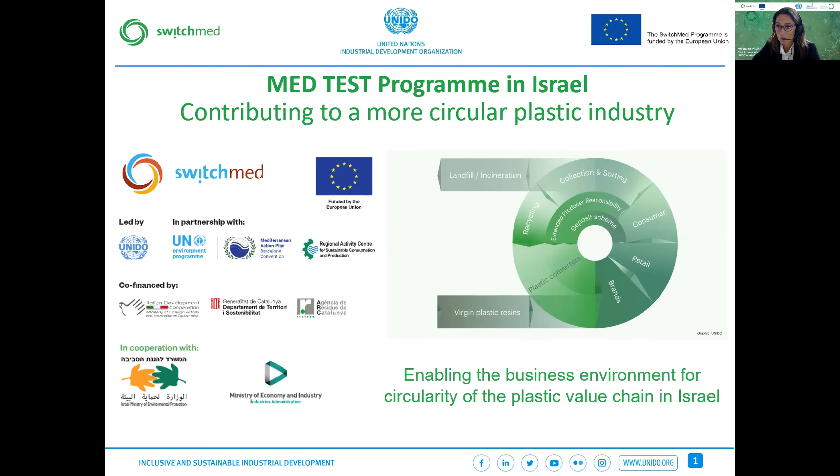And actually, we are active along 3 main areas of intervention. The first one is completed so far, and it implied the first analysis and review of the current plastic value chain in Israel to understand where are the opportunities for introducing circular business models and what are the challenges that we would like to address. The second area of intervention has also been closed so far, and we have been working closely with the Association of Plastic Producers and Manufacturers in Israel to support them in putting forward guidelines for design for recyclability of plastic packaging, and we have closely worked with them and also with the government to design standards and policy incentives to promote circular economy. And finally, a third area of intervention that has also been completed so far was related to supporting the government in conducting a pre-feasibility study to establish a PET bottle-to-bottle recycling plant in Israel.

Now, when it comes to the phase that has already been completed, we have received a lot of interest from a number of stakeholders to participate further in demonstration activity. This is why we have designed pilot projects that are currently under tendering, so we expect to launch them by the end of this year. We have conceived currently 3 different pilots. One is focusing on setting up collection, sorting, and recycling of plastic waste from the agriculture sector. A second pilot is focusing on circular design of plastic packaging, and finally the last one is related to logistical and business models for recycling flexible packaging.

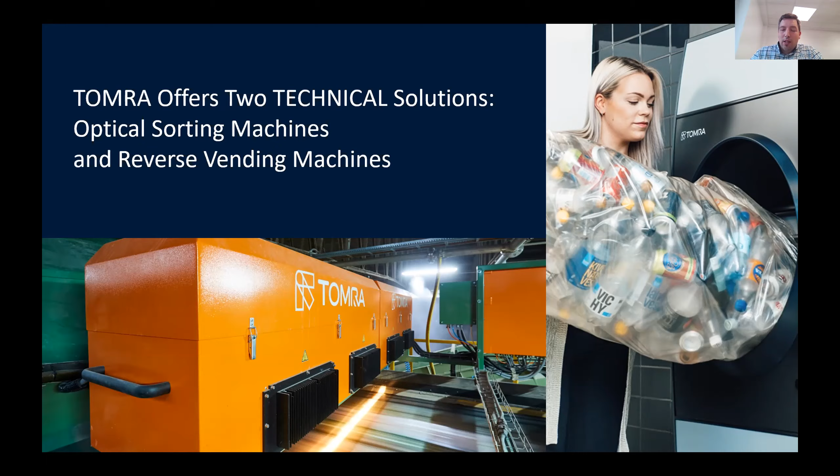Our role in this is that TOMRA is now already 50 years old and basically a passionate leader in that industry. Especially the division where I'm part of, the circular economy team, we really focus on collection, sorting, and recycling, and look at that from a holistic perspective in order to really create closed loop systems. Many of the presentations you will hear today are either our customers, partners, or friends, and the industry moves toward that. Basically, we are all really here to help the world recycle.

If you think about sorting conceptually, basically sorting is done for 2 different reasons. On the first hand side, you have a recovery of plastics. Again, we are today focusing on plastics, recovering plastics from mixed waste streams. And if I say mixed waste streams, it could be different sources. It could be waste which is already separated, so source separated plastic packaging. But it could also be plastic which is recovered from mixed waste, so from residual household waste. I'll come back to that later on.

So that is one part, let's call it primary sorting, where you really recover the plastics from waste streams. Then the second part where sorting is applied is during a recycling process, mostly the mechanical recycling process, where you basically increase the quality of the material throughout the process, and where you would do different sorting steps. I'll come back to that later on.

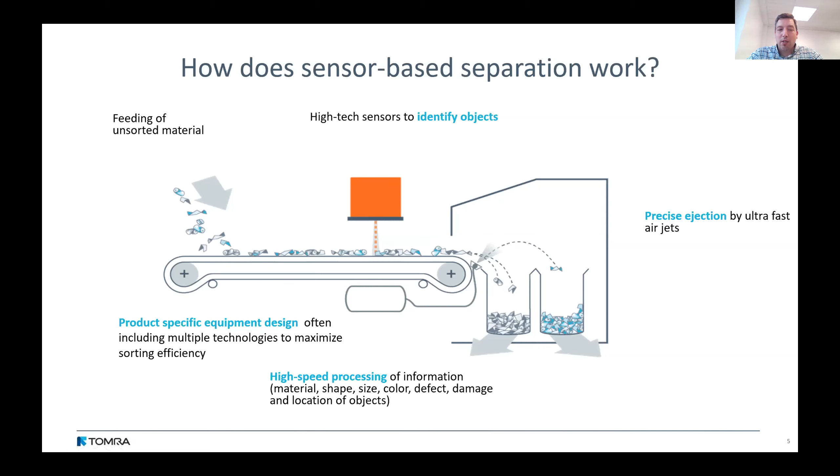When it comes to transportation, there are different means. Either it could be on a belt or on a chute. The chute system is smaller in footprint, the belt system is larger. You would use a belt for material which is not uniform and does not behave in a uniform way—for example, if you sort out waste, you have different kinds of objects and need a belt to be able to separate it. If you have smaller, uniform objects like flakes, you would use a chute-based system, because everything flows nicely and it's easier to use in a chute setup.

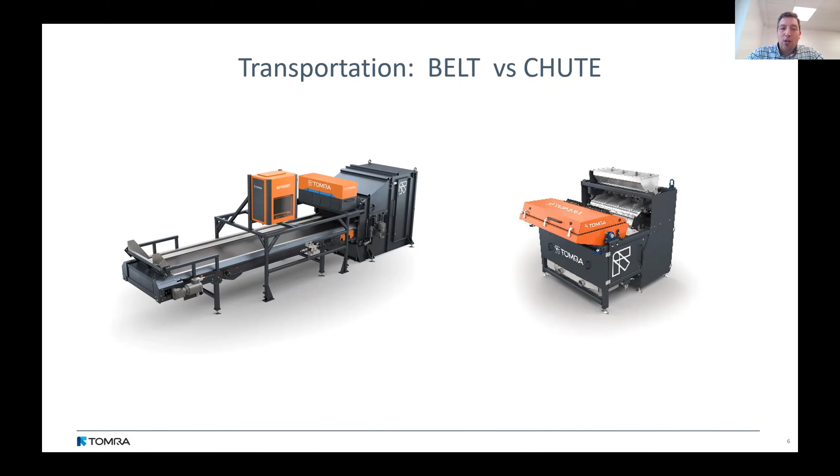When it comes to detection, there are many different sensors available today, across the electromagnetic spectrum. For plastic, the state-of-the-art technology used is near-infrared spectrometry, where you basically use the spectral information to differentiate different types of plastics. But you can also use color cameras, for example, to discriminate the color. There are a whole host of other technologies used more in other applications, like X-ray, which is used in metal sorting. You could also have electromagnetic sensors, or lasers, laser fluorescence, and other things. But again, for plastic, it's mainly near-infrared spectrometry as well as visible spectrometry which is used.

When it comes to ejection, there are basically two kinds. The most common one is air ejection, where you have a valve block with many different valves, and depending on where the object is, it's ejected. This has already been state of the art for 25 years.

What has lately been introduced to the market is using robot arms for ejection. Pros and cons: the disadvantage of a robot arm is that it's rather slow, so you can do about 1 to 2 picks per second. The benefit is that the robot is more compact, and it could do sorting into many different fractions. While sorting with valve blocks can be done at a very high speed, the disadvantage is it takes a bit more space, and you can only sort into 2 different fractions at the same time, so you need multiple sorters to sort into more than two fractions.

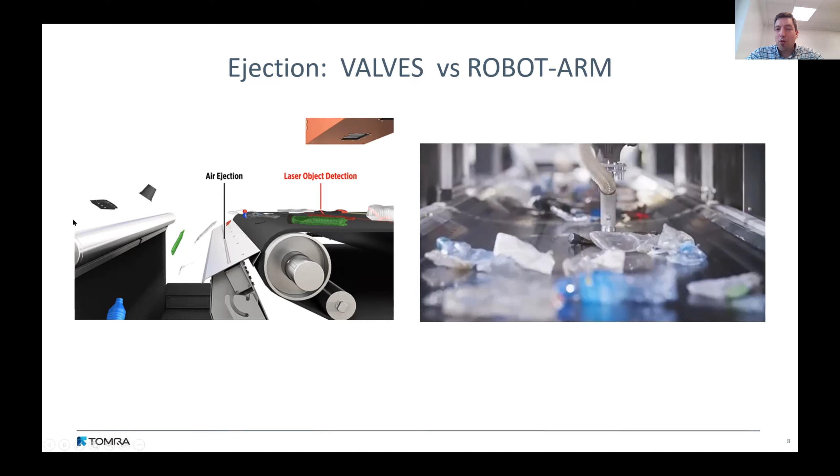When you come to a sorting concept, basically a sorting plant has many different sorting steps, and not all of them are sensor-based. There are also mechanical or physical separations like sieves or magnets. Especially when it comes to separation of plastics, you use sensor-based sorters. In a typical MRF, material flows over different sorting steps, so at each step you're sorting something out and the rest goes on, creating different outputs. At the end of the day, it's about your economy of scale and how many outputs to create. The latest, biggest sorting plants could easily have 20, 30, 40 or even more sorters present.

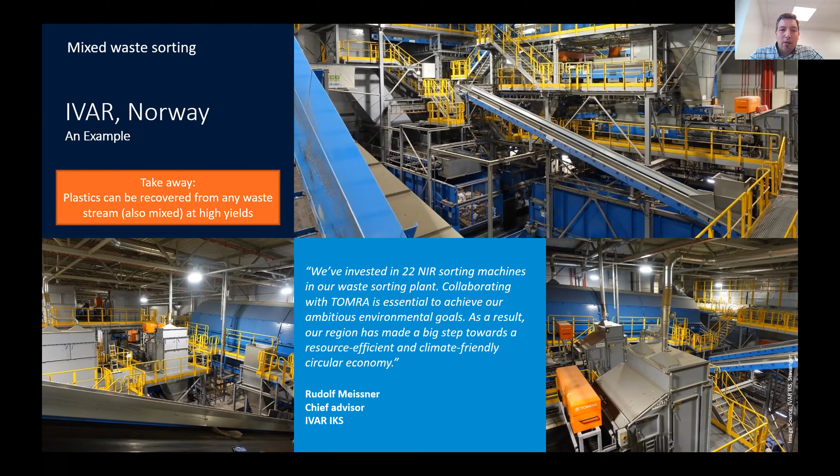Here is an example of a mixed waste sorting plant. Mixed waste means residual waste—not a source separated plastic fraction, but really the mixed household waste. This example is based in Norway, where we have several plants operating on that concept. Here, 22 sorting units are used. The takeaway is that today it's economically and technologically feasible to recover plastics out of any waste stream. Even with a totally contaminated waste stream where everything goes to one bin—like plants we have in the Mediterranean, in Greece—it's possible to extract plastics out of a very dirty waste stream. That's not a technical problem anymore. It's solved, and it's done in many plants worldwide.

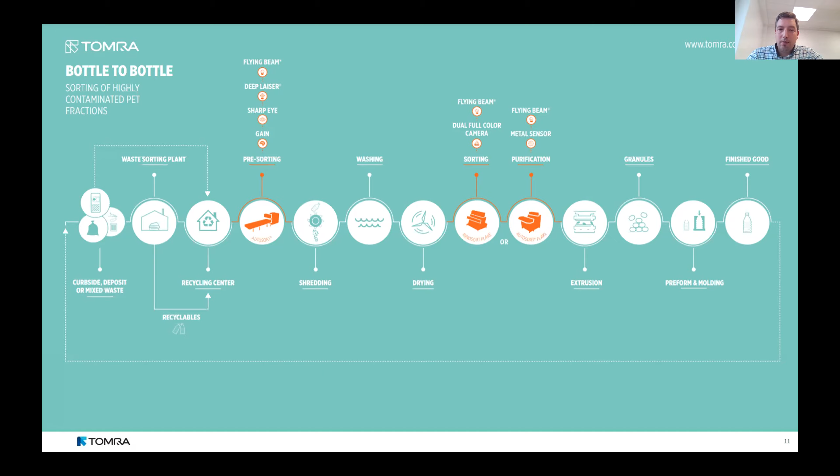Another example is high quality recycling, not only for PET but also for polyolefins and other plastics like polystyrene, polyamide, or polyurethane. There we've teamed up with Borealis, creating a demonstration plant where we show that with the right sorting, washing, and extrusion, you can also reach high quality recyclates with any other kind of plastic. Today you'll hear a lot about this—I think there will be a presentation from Nextloop and also one from Morsinghoff, which will explain that concept further. But really, there's no reason why other polymer types besides PET cannot be brought back to high quality with the right process parameters.

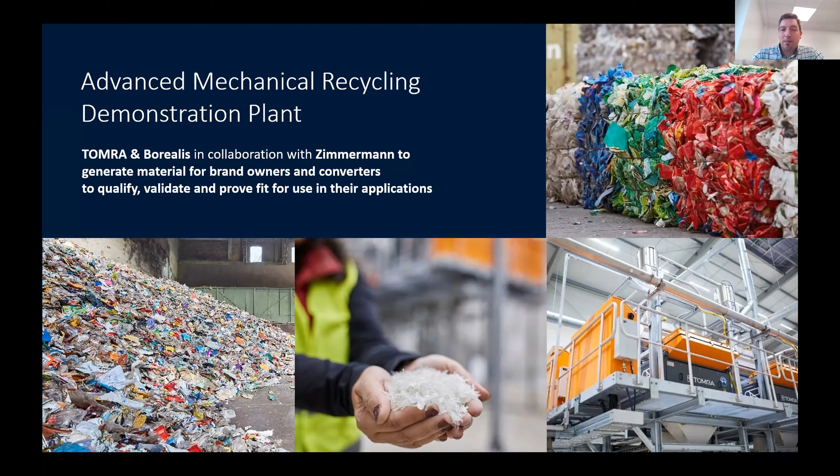There is also a role for sorting in chemical recycling. Basically, we have to capture the feedstock, so you need to sort household waste to recover plastics and make them available for chemical recycling. It's also a matter of preparation of feedstock and quality control. Most chemical recycling technologies cannot take totally wild feedstock; they have quality specifications, as PET or PVC might be an issue in pyrolysis. So you need sorting to make sure you don't have too much PET or PVC contamination in your feedstock going into pyrolysis.

So to conclude, what is state of the art? It's state of the art to extract plastics from any other kind of materials. It's also state-of-the-art to sort plastics by color and by plastic type, sorting rigids from flexibles, and we can even go a step further to differentiate PET bottles from PET trays.

What's the future? The future is to do even better sorting. For example, sorting by melt flow index to differentiate blow molded versus injection molded objects. Another big thing is sorting food grade versus non-food grade. This is necessary under European legislation on food grade, to make sure something was food grade before it goes back to food grade.

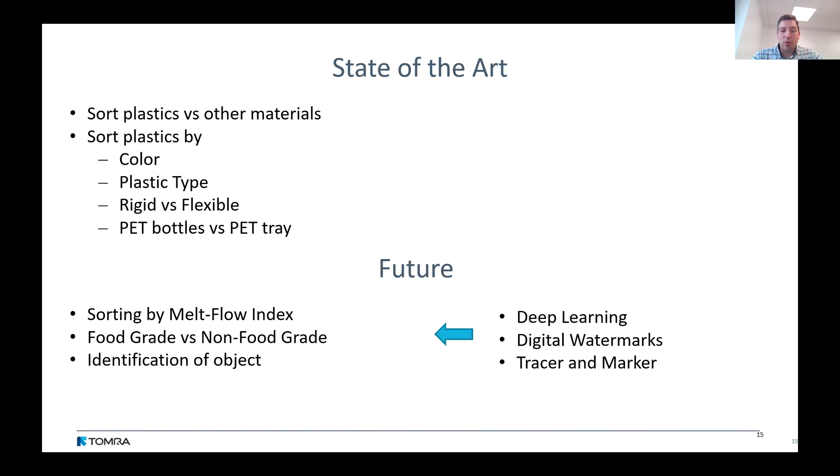The third method to achieve this is with tracers and markers. You will later hear about Next Loop, who use fluorescent markers to identify different features which cannot be identified with conventional sorting processes. So my summary is that sorting technology can already solve a lot, and most of today's problems can already be solved from a technical point of view. Sorting is currently not really the bottleneck — the bottleneck is more around the economics of sorting. That would be my main message to you.

So are there any questions?

Perfect, Daniel. Thanks for this presentation. I think you've broken or challenged a lot of strongly held conceptions in the sorting and recycling domain, which is really, really interesting. If there are no questions, I want to take the opportunity to ask you my million dollar question — not many opportunities that we have to speak to Tomra.

What do you think is better, separation at the source or sorting at the MRF through mixed municipal waste? From a fundamental point of view, sorting at source is maybe not really needed. If you start from scratch, say in Indonesia or Vietnam where you have nothing, what should you start with? Maybe you would really start with collecting the waste and sorting it out later. Of course, if you've already established source separation systems like we have in Europe, it would be stupid to abandon them — they have advantages and make recycling easier. But source separation makes recycling easier, not sorting at source doesn't make it impossible; it just means you need more effort on the recycling side — better cleaning processes, better sorting, better washing, etc. So let's say it's helping. If you've already done it, you should keep it, but maybe it's not absolutely necessary if you're starting from scratch and wondering whether you should have 2 bins or 5 bins or 20 bins in a country which currently has nothing.

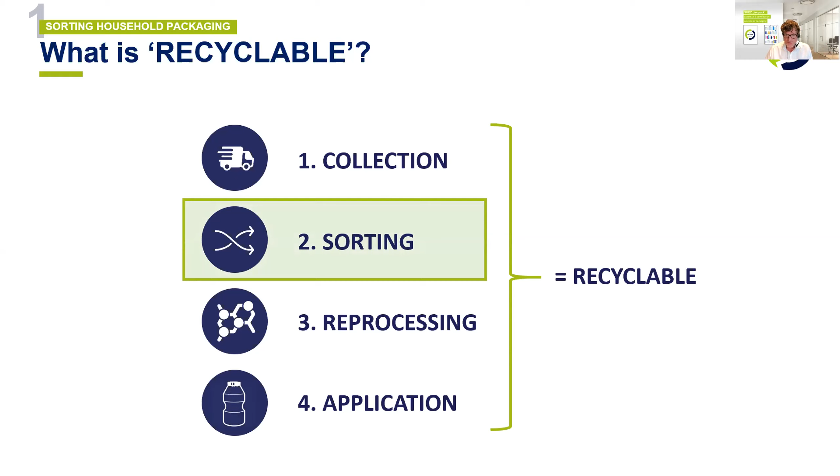The process that follows before it goes to a reprocessor. Here is a schematic overview of the process of a sorting facility. This sorting facility specifically was built for plastics, metals, and beverage cartons. Other countries or lines specifically also take in glass or cardboard together with these plastics and metals, so the technologies in place here might differ a bit from others, but generally these technologies are used worldwide across different industries.

As soon as you have an automated sorting system for packaging waste, these are the technologies in place. The waste gets unloaded from the truck to the facility, and there we do a quick inspection. We take out some unwanted materials, large pieces of garden furniture for instance, or metals, but also huge pieces of film, and the rest will be put into the bunker, which is pushing forward very slightly, very slowly.

Then you have a bag opener, because people put their packaging waste in bags. These bags need to be opened because we want to identify each packaging item individually. That's why we actually have another bag opener, to ensure that even if people have put it into two bags, everything will be separated before it enters the rest of the process.

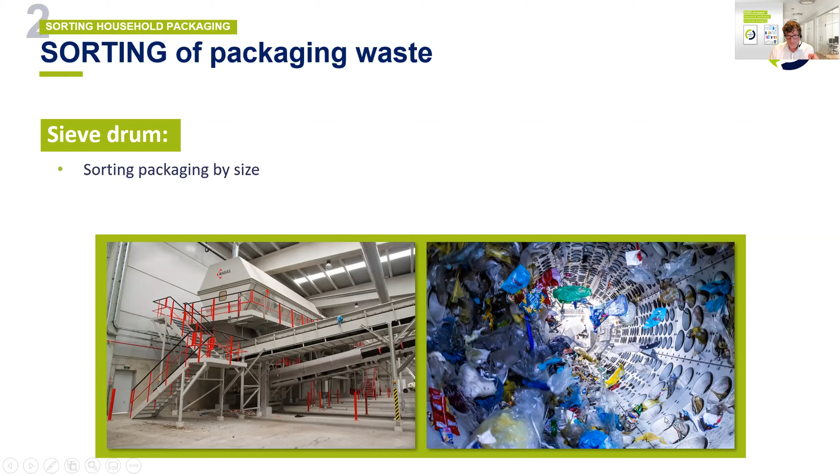In each sorting facility, you see these big tubes running to the facility. This is basically where the lightweight materials are actually sucked up and transported to a bunker or a conveyor belt where all this material comes together. And that's a good way of doing a first separation of the lightweights from the rigids.

The overbelt magnet: materials on the conveyor belt, a mix of materials, and just this magnet is on top of it, picks up the ferro metals and releases it afterwards, and that's how you get a separation. Let it fall after the threshold.

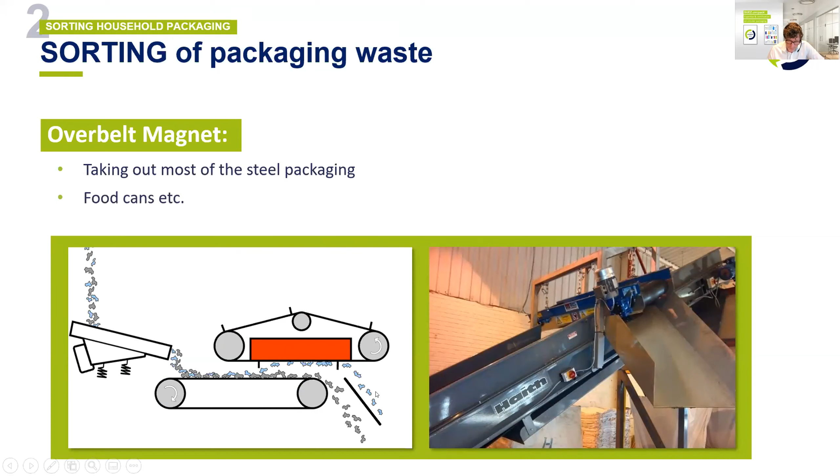Similar thing, but now with eddy current. So there's no magnet on top, but there's an electrostatic charge created underneath, which actually makes non-ferro metals jump out. They want to get away from this electrostatic charge.

Here we actually see that there's a difference in behavior between the rigid pieces and things like film, which are more flexible and larger. And that's basically like having an apple fall from a tree or a leaf fall from a tree. If it's an apple, it will fall down in a straight line. So in this case, it's much easier to eject over the threshold because it will go out in a straight line. And if you have a flexible piece of aluminium film, it will react, but it will probably not pass in a straight line. It's got too much friction in the air, so it will most likely fall down already.

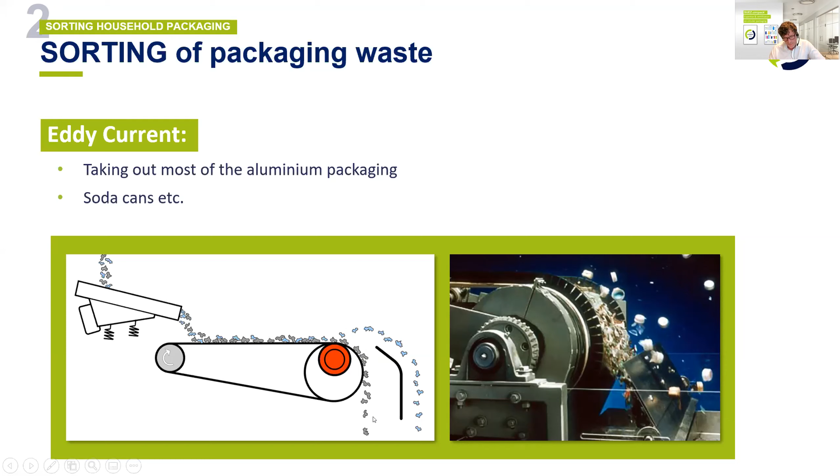So here, well, I'm not sure even if the source was TiTech or Tomra, looking at the previous slides of Daniel. But indeed, this is the representation of the infrared system, where we can see this picture. So we see this Coca-Cola bottle there, and this is sort of a representation of what this infrared system sees. And you can already see there that we know it's a PET bottle. And that's correct because it's green on both ends.

We also see that there's some blue on top, so it must be an HDPE cap. And then this sleeve, there we get a mixed image because the system actually doesn't know what it is. It's really a combination of materials.

The depth at which it is looking is somewhere between 80 and 100 micron. So every material between this 0 and 80 or 90 micron, it will get a reflection of. So it's basically looking not only at the sleeve, which might be 45 micron, but also the PET bottle underneath. And that's why it gets a mixed image and is not entirely sure what this looks like.

Well, there are new technologies upcoming to get better recognition on this. And luckily, because it's got PET on both ends, the system knows that it should sort it as a PET bottle. But you can imagine if you have a full body sleeve, really from the top to the bottom, that it might be very difficult to do so.

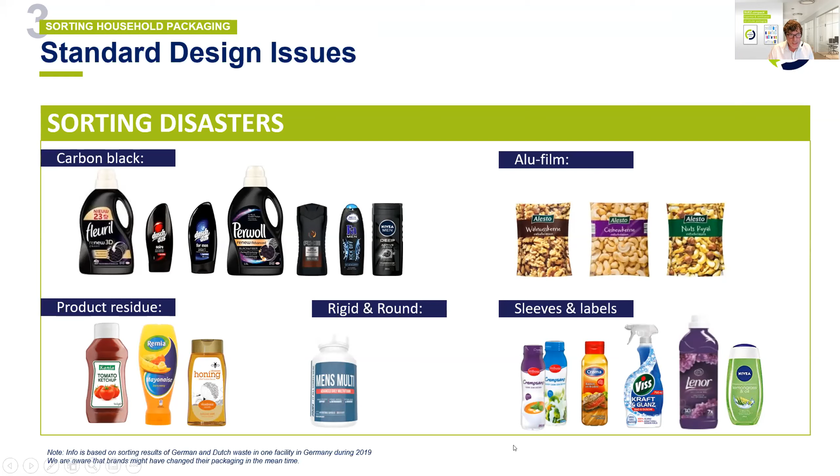These are really big issues in the sorting, and well, they can luckily be made up partially by new sorting technologies that are upcoming.

Already discussed robotization, image recognition, and deep learning, which will be really helpful in understanding the packaging, not only in positive sorting, but also negative sorting. Meaning that, for instance, silicon sealant tubes are typically made in PP, and silicon is something that you don't want in between your melted plastics, because it will not melt. So it causes a lot of issues at the extrusion lines. So if you can already take it out by just knowing, hey, this is the shape of a silicon sealant tube, and these are the brands, and this is what they normally look like, that can be very helpful to separate them.

Another thing is all these digital watermarks, the Holy Grail 2.0 project already mentioned. There's a semi-industrial scale pilot ongoing in Copenhagen at the moment. It basically means you have packaging which for the human eye looks completely normal. Only if you look very carefully do you see small dots in certain patterns, which makes it actually behave like there are barcodes all over these packaging. And these barcodes give information to feed to the sorting system, but also to the cash register at the supermarket on what to do with it.

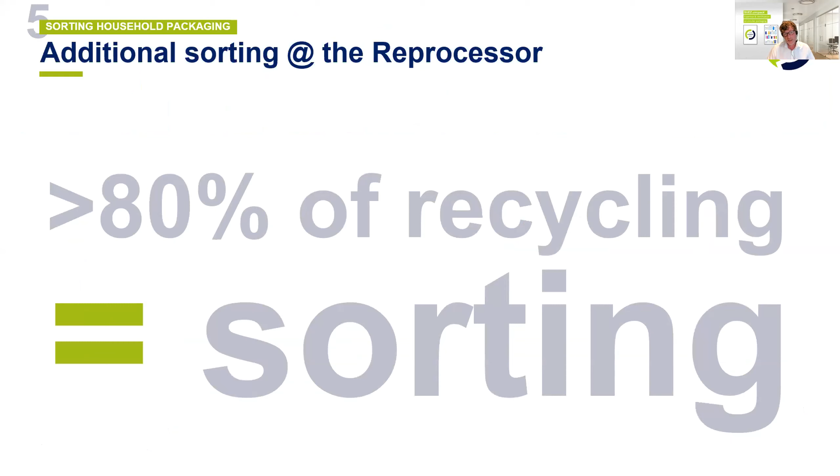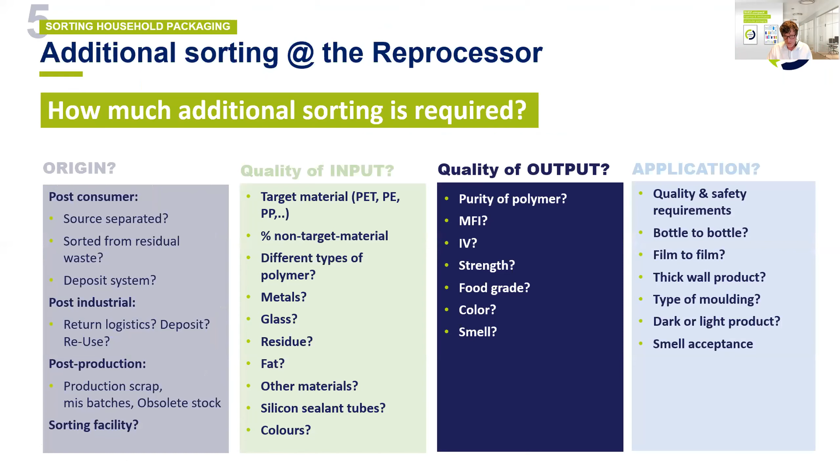Thanks. So after all this sorting, material will go to a reprocessor, and even there a lot of additional sorting is required, because more than 80% of recycling is about sorting. How much needs to be done really depends on origin of the waste, the quality of the input, but also on what output is desired and for what kind of application. That's an important thing to understand, but that will come later during these days.

Just for your information, there are huge differences throughout the world. Really understand your local market on producer responsibility systems, but also on EPR fees and taxes. Recycling results can differ hugely per country. What is collected, how is it collected, is it part of a deposit system, is it curbside collected, and which materials are actually sorted and reprocessed? All this combined will define what you have to deal with as a brand owner, and as a packaging company, to ensure recycling.

The UK market for flexibles - very little of flexibles in the UK are collected. Where they are collected, it's generally films that are collected rather than the actual packages themselves. So this is the journey from a country that hasn't really grasped the collection and sorting of flexible packaging itself. First off, we need to understand where in the system flexibles will fit, how much arises from households, from household-like businesses where the waste looks like household waste, as against pallet wrap etc. which fits in commercial packaging. So separating those to understand where the materials arise and how much will actually get through to the different streams we're collecting.

So we did a lot of work. We did top down - placed on market figures are quite difficult to identify because you can't really understand what you want to collect until you understand what's placed on market, and not many organizations seem to have a good grasp. So we did top down first, three or four different ways. And then we did a bottom up - we went and collected detailed composition analysis of how much flexible packaging of what type appeared in the residual waste, that's not going to recycling, and how much appeared in the recycling waste, which gave us a good grasp on the composition by all the different packaging types.

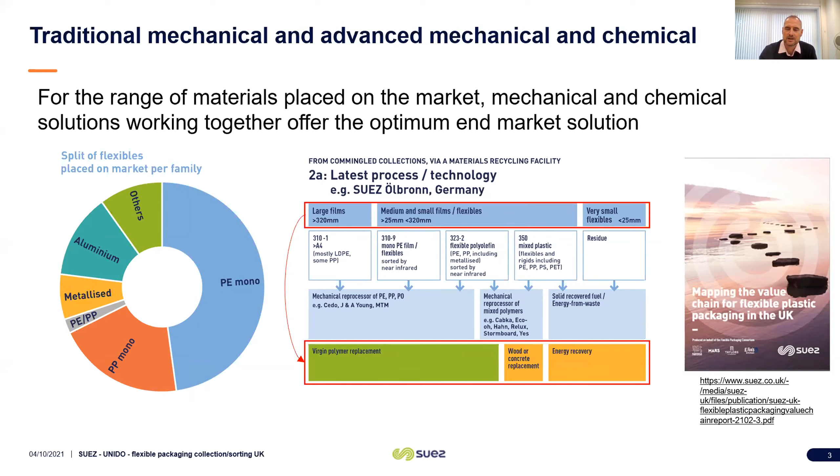Then for ease of management, not only in this work but also the work we've just completed on industrialization, which I'll come to towards the end, we split them into families, because once you've got them into families you can understand how each will be treated and where its end market will be in that process. So in the flow diagram 2A, you can see how those materials split out, how they're going to be collected. We used some of the information that Vincent and his team got from other sites to help us put that together in terms of what would arise, what size would arise - because size becomes important - and what we can do with it in the end. Large films go to virgin polymer replacement, and as you get smaller and more complex materials, it's going to wood or concrete replacement. Ultimately, in this example, that's too small or too mixed, going to energy recovery.

So how you collect determines what you want to sort. If you collect the materials on their own, source separated, then you don't need a sorting plant to separate them from the other hard recycling materials. If you collect them commingled with other materials, be it other plastics or materials beyond plastic, then you need to design your sorting plant to separate them from that stream.

What you need to do though is make sure that we don't have fiber products mixed with the flexibles, because of the 2D nature that they present.

So again, looking at how many packs, looking at where they arise, and understanding in detail. One of the key things is also what product they had in them. Generally, users of packaging that has wet product in it, such as cat food, dog food, or toothpaste, tend to leave a fair volume of product in the packaging itself, which creates issues on collection - smell, leakage, and contamination to other products.

So we split not only into the families you've seen before, but also into dry and wet, to represent their likely composition of contamination that was going to come in, that was in the packaging in the first place.

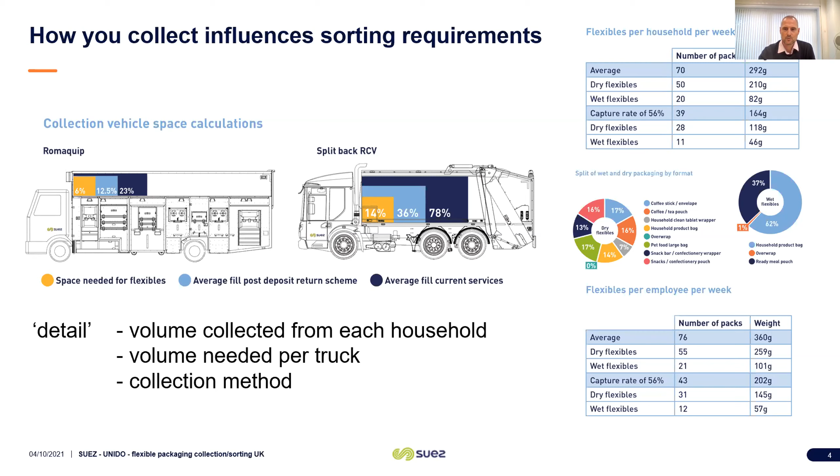And obviously that requires a different transfer station where we bulk up, and simple or complex sorting, depending on how we've collected it and what we've collected it with. We need to understand that to understand what our role is.

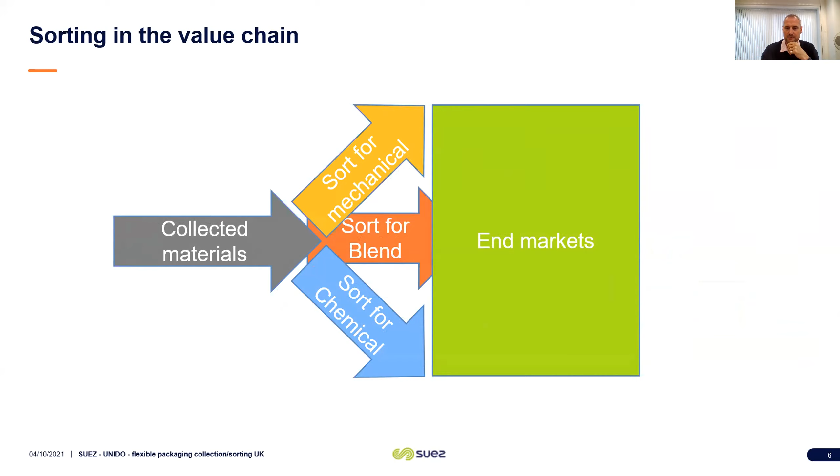And then obviously, once we've collected our materials, we need to understand what end market we're going for. Are we sorting for mechanical? Are we sorting for a blend? Or are we sorting for chemical recycling to get into our end markets?

So we ran through a series of designs. Here you've got one based on our Rotterdam plant, and another on our Ölbronn plant, where we looked at the difference between the two. Obviously different plants, but Ölbronn went down to a smaller size. So we're then sorting and collecting to look at where those end products would be.

When we got to medium films and flexibles, 25 mm to less than 320 mm, some of those could go into virgin polymer, but some were going into wood or concrete replacement. So again, going through those options to understand what we're going to recover for.

And for EPR, where the recycle rate is important, the volume that goes into energy from waste - which is recovery, not recycling - was material to understanding meeting some of the EPR and recycling targets.

We then looked at mixes of chemicals, so same flows, splitting them between different types of polymer and film and different sizes to understand where they might end up.

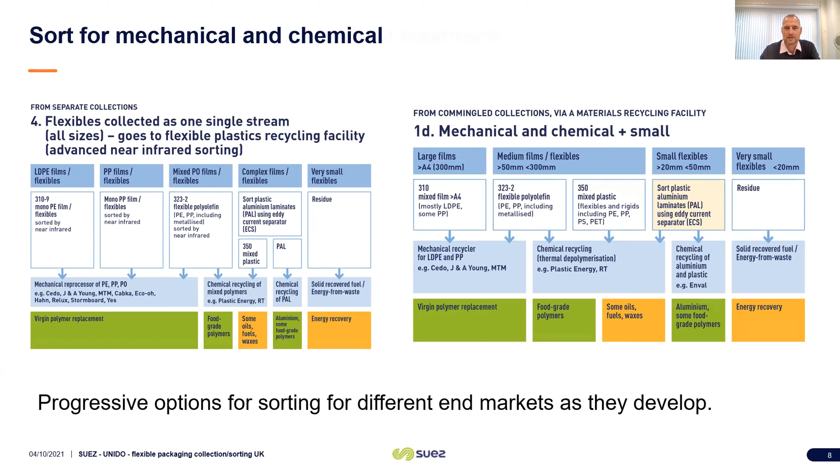Ultimately, we ran through 12 different options. If you want to, I've shown a copy of the report. We had to look at those 12 as the main routes to market for flexibles in the UK, based on different local authorities. If you're collecting from a very urban area, from a city, then your options of how you collect are very different than if you're working in a suburban area or a very rural area. So it's key, therefore, to understand how your source market is going to work.

And then also, if we're going to chemical recycling, we're then looking at how do we measure that? So if we go to chemical recycling to fuels, then that's recovery, not currently classed as recycling. There's some process losses in there that are either used to fire the process or are unacceptable. And then if you put it into a refinery, the refinery has its own process and looks to effectively hypothecate end products so that you can allocate 1,000 tons in, you can make 1,000 tons of recycled product. Again, making sure that process flow and mass balance flow is acceptable to the regulators that will ultimately allocate the recycling content of any products.

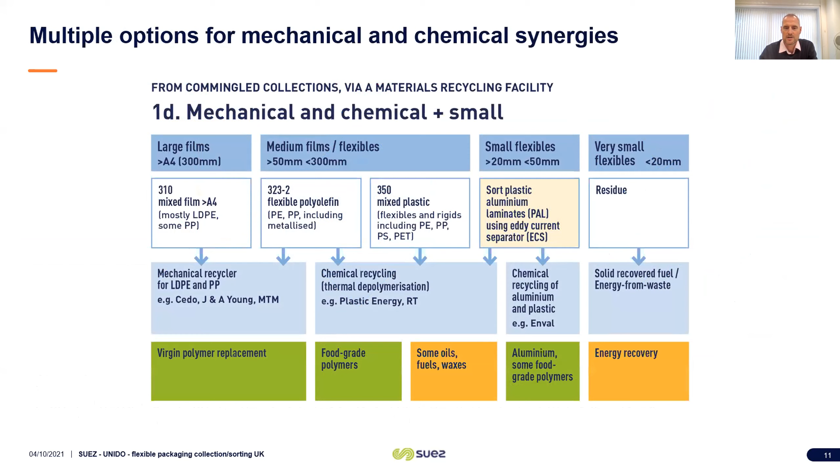So when we looked at, coming back to this one, just a reminder, we looked at mechanical and chemical and how the mix and the size. The work we've just completed was complete industrialization. We've been through every local authority in the country, which is more than 350. We've been through all the different styles of business to understand what they're likely to collect, what they're likely to produce and when. And then we've looked at how those flows need new infrastructure and new processes.

And we looked at that through a number of different options, so mixed with other plastics and cartons, fully mixed with other materials except paper and card. And then we looked at an add-on option of wet flexibles collected separately, so wet flexibles in a bag and dry flexibles with the remainder. So a mix of a bag for wet flexibles and then 2 or 3 for the remainder, and to work out the cost and the profile of doing that.

We then had to look at sorting yields, mechanical and chemical. So working through what we expect to get if we're sorting to greater than 50 mil or greater than 25 mil, so 80 or 85%.

What the mechanical reprocessing yield is likely to be on average, 80% to allow for. And then chemical recycling, which current activity, and we have our own chemical recycling process, is around 85% at the point that it enters the plant. So overall yields, 80% sorting and 80% of the materials passed through sorting being reprocessed gives you an average about 64% upper performance for mechanical, and 85 by 85 gives you about 72% for chemical.

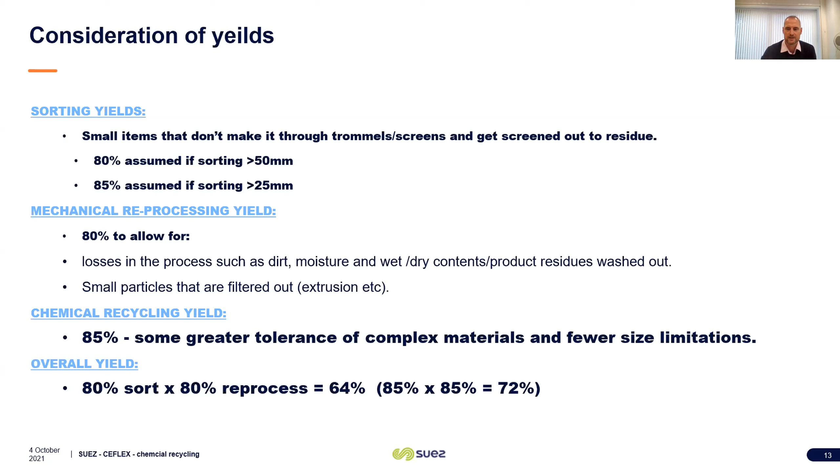So chemical has the ability to deliver a slightly higher recycling value than others. So what does that mean in summary?

Collection of feedstock drives the sorting end markets. So understanding how it's going to be collected, understanding how you get the behaviours right to get people to put the materials in the right bag in the right place. Clear signals about collection will engage investment. If you understand how you're going to collect it, then the investing requirements for the sorting plants, for the MRF sorting plants, etc., and the chemical recycling is there. Chicken and egg is collect first, and the markets will follow.

Chemical recycling does offer key to upcycle and deliver virgin polymer quality and outcomes for some of the feedstocks, and gives somewhere between a 5 and 10% uplift in ultimate recycling performance. Obviously, there's a lot of proving to do on chemical recycling to make sure that we can actually achieve the qualities and the reliance and the commercial outcomes that are needed.

In all chemical recycling, some materials may end up as fuels or waxes—still productive, but obviously not counting towards recycling.

Policy visibility and transparency are super important to drive investment, and there are significant numbers—hundreds of millions of pounds in the UK sector—needed to get flexibles collected, sorted, and recycled.

In designing the transition, nothing happens immediately. We think it'll take maybe 5 or 6 years for all the local authorities in the UK to implement a collection system that supports the sorting and treatment infrastructure behind it. We think business will probably be on a roughly similar profile, based on fleet replacement age. So planning that transition means going through the whole leg—not having facilities with no feedstock, but also not being in a position where we have feedstock and no treatment.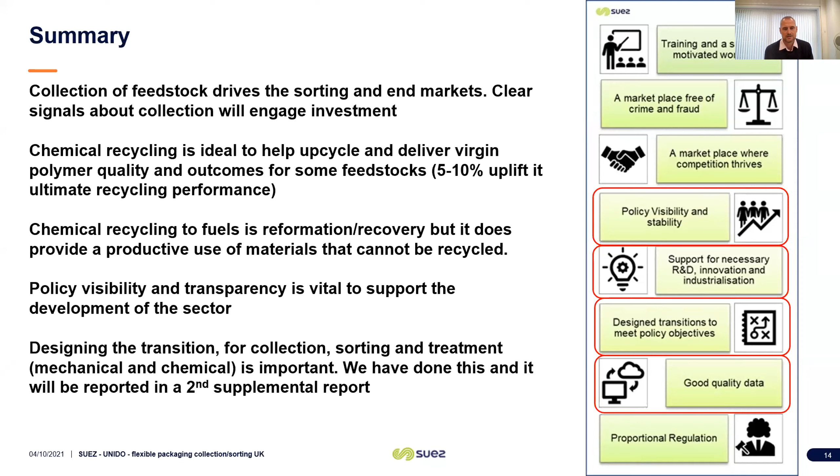Great, Stuart, thanks a lot. This is a very timely presentation and topic, because there is now a UNIDO-driven project exactly on this topic of flexible packaging in Israel. So we'll probably be in touch in the near future to ask you some questions. There was a question in the chat, but unfortunately we don't have any time left, so if you could be so kind as to look at the chat and try to answer that question. Thanks a lot. No problem.

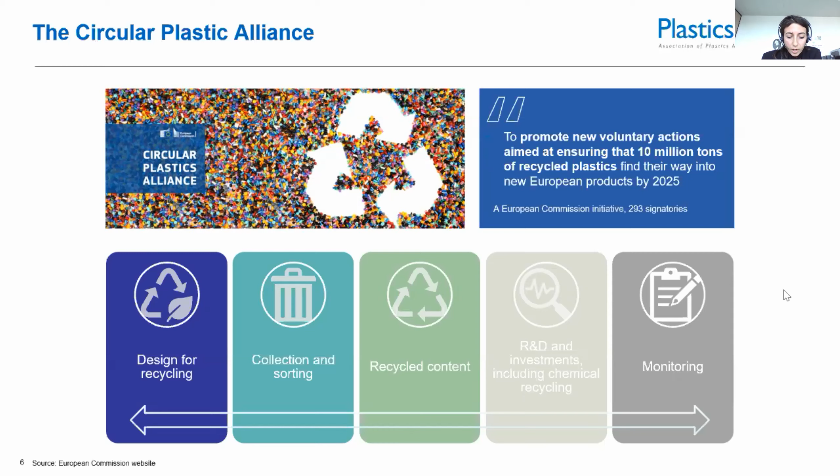On this slide, you see a diagram that exemplifies very well why an integrated approach along the value chain is needed. The idea behind this diagram is the CPA vision that design for recycling, increased collection, and better sorting will all contribute to producing a more reliable feedstock and therefore lead to high quality recycled content. The definition of guidelines and potentially standards on design for recycling, but also quality of waste, quality of recyclate, and how to integrate them into new products as recycled content will be critical to having products that are better designed for their end of life.

Really all the activities you see along this diagram, along this circle, are interlinked to one another. This is why in the CPA, the views of different parts of the value chain are integrated to really build the circular economy for different products.

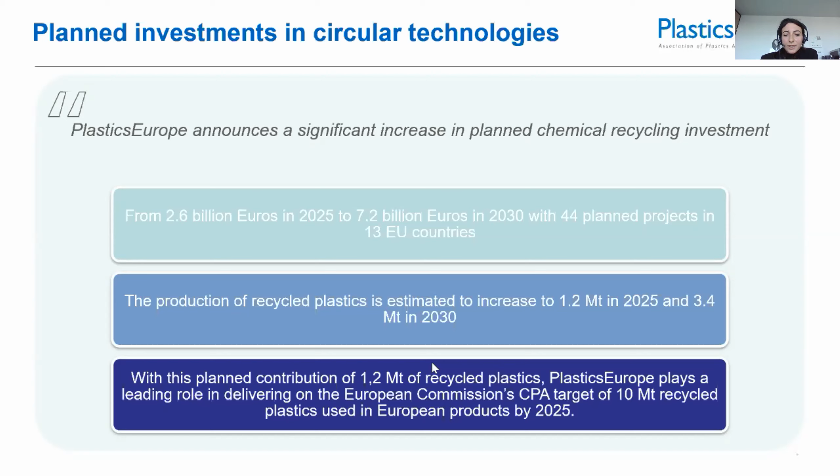So just to conclude, overall, I think we are contributing both to catalyze design for recycling to accelerate mechanical recycling, but also contributing to the CPA target of 10 million tons by planning to produce 1.2 million tons of recycled plastics through chemical recycling. In summary, I will conclude that we believe collaboration and cooperation with the value chain, different stakeholders, partners, and authorities is key in advancing the development of the circular economy in Europe, and we see a real opportunity in the CPA in capitalizing on its work and knowledge production for that. So thanks for your attention, and that would be my presentation.

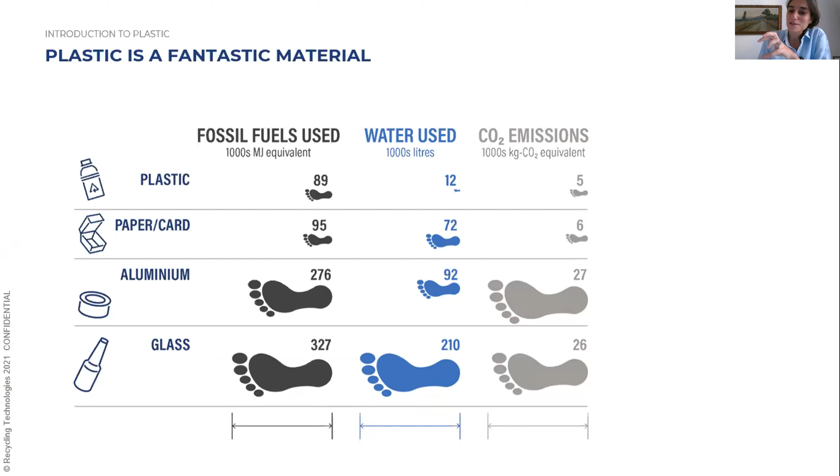So indeed, I'm Sales and Marketing Director for Recycling Technologies, which is a startup based in the UK that works on chemical recycling. Chemical recycling, basically, is about trying to maximize the residual value still left in plastic waste. We often like to start by saying that the general public often thinks plastic is a bad material. But when we actually compare plastic packaging with other packaging materials like paper, aluminium, or glass, we can see that plastic has a lower environmental footprint in 3 of the major categories: the amount of fossil fuel used to produce it, the water used, and the overall CO2 equivalent footprint. So we always fight the battle for plastic by saying that plastic is a great material, and actually the challenges we've got today are not caused by plastic, but by plastic when it becomes waste.

When we actually start looking at the size of the problem, let's move away from plastic as a product and look at plastic as waste, and the mismanagement of plastic as waste. In the UK, there are about 4 million tons of plastic waste generated, 32% of which is recycled according to official sources, but the majority, 68%, is disposed of in other ways. That's a mix of landfill, incineration, sometimes just burning, sometimes for production of electricity.

So that's why you see energy from waste, or exported. Very often in Europe, or in some countries, we have this little habit of sending it away, exporting waste, and effectively giving away the responsibility of disposing of it properly.

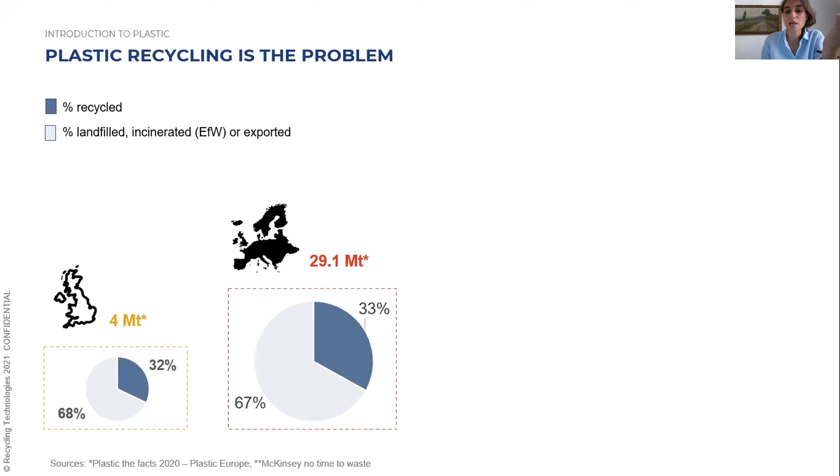And the numbers don't really change if you scale up. Moving from UK to Europe, the generation of waste or volumes of waste increases, which naturally goes with population. But the percentage of recycling versus non-recycled doesn't quite change: 33% versus 67%. And if we scale to a global perspective, 260 million tons of plastic waste was generated - this data is from 2018, if I'm not mistaken - but again, only 12% of that is recycled globally.

So this gives an idea of the size of the problem, but also potentially the size of the opportunity. Here, this is the vision that recycling technologies and many chemical recycling companies have for the future of plastic, for better management of waste. I appreciate it's a bit of a complicated slide, so I put some bullet points on the right for you to read, just in case you get lost in my presentation.

But if we start following from number 1, this is the value chain we're trying to portray. We are consumers, we live in our homes, we buy products from the retailers. We bring them home, we consume them. And the waste is then brought to a MRF, material recovery facility. Different countries will have different terminologies - you might have sorting center, MRF, plastic recycling center - but the concept is that the waste you throw at home is brought to a single place where it's then separated into different valuable items.

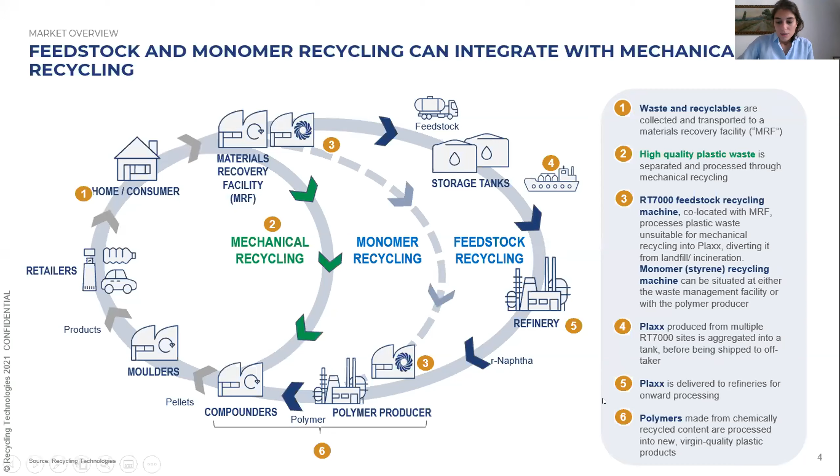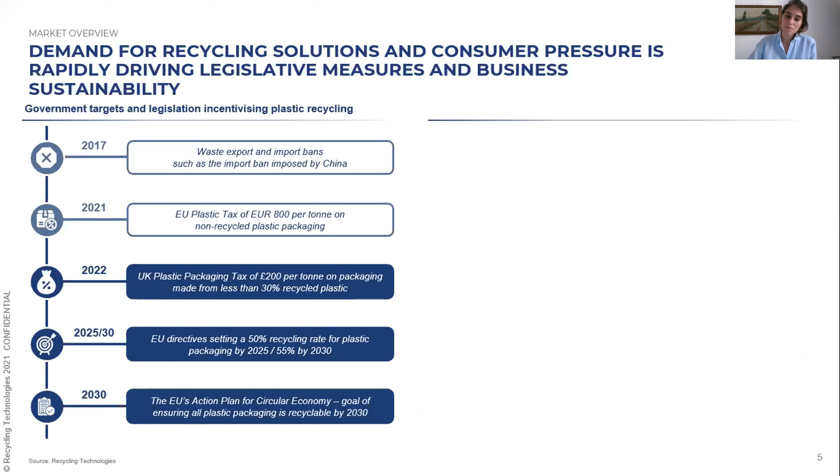There's a lot of legislation falling into place, and general demand driven both by regulatory drivers and private commitments, as we can see here on the right. We are in the UK, not in Europe anymore, but still in the European area and zone, which is driving this agenda very hard.

The situation started escalating in 2017, because Europe, and the UK specifically, used to export a lot of waste to China. In 2017, China closed the import boundaries, and that started creating a problem of what do we do about it.

In 2021, a couple of taxes came into place, like the plastic tax, trying to drive the agenda heavily, with a whole 10 years worth of roadmap towards incentivizing in-house recycling. We also have companies across the world, from petrochemical, oil and gas backgrounds, but also many brands that have made considerable pledges with respect to chemical recycling. This is very positive for recycling in general, and chemical recycling specifically, since there is demand and regulatory drivers coming into place in the right direction.

Let's zoom into recycling technologies. We often call ourselves RT, recycling technology is very long, but we're a startup, or we were a startup, founded in the UK in 2011. It's basically all been about trying to bring to market an IP that was developed by Warwick University.

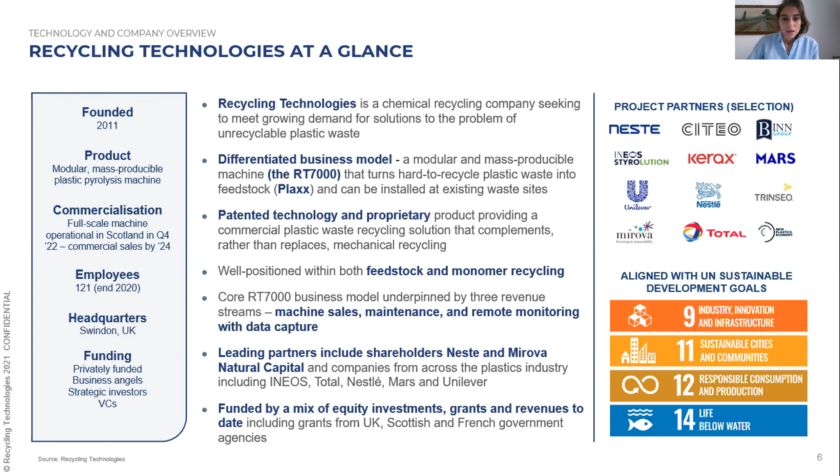Residual plastic, imagine you have your plastic bin, you throw all your stuff in it, and somebody takes out the bottles. What is left is basically destined for our machine. It's shredded, dried, pre-treated a little, and then fed into the thermocracker.

The thermocracker is another way of describing the pyrolysis vessel, and what it does is vaporize plastic. It's a vessel at extremely high temperature, an agitated environment with sand moving, and plastic comes in solid, then vaporizes into a crude oil vapor, because plastic comes from the refining of crude. So it gets chucked back into crude molecules.

I always use this analogy, not knowing the level of education of the audience in front of me: imagine plastic being a wall made of Lego bricks, all perfect and tidy. Then you smash it on the floor and it breaks into all different bricks, of different sizes. You can't control the distribution of that. That's exactly what happened with plastics, so plastics is our wall.

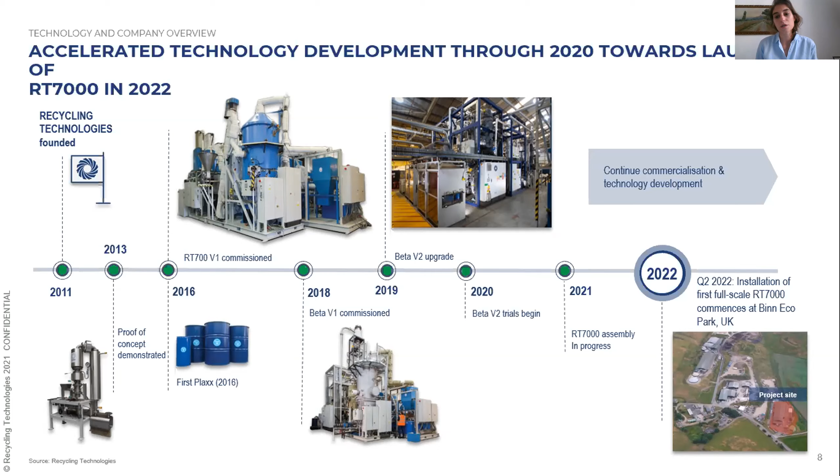We did have a couple of questions on the issue of mechanical versus chemical recycling. In the minute that we have, I wanted to ask you, in your perspective, when is chemical recycling the go-to option, the first option, and when would you say mechanical recycling is plenty? So mechanical recycling is always the best option when you can.

For example, if we think about a PET bottle, like a drink bottle, a Coca-Cola bottle, which is 100% clean, made of PET, you would never ever put that into a chemical recycling system, for the simple reason that it is recyclable, it does work, and it's not too expensive for the environment or from an economic point of view to recycle it mechanically.

The right question should not be how is chemical recycling versus mechanical recycling. The right question here is how is the environmental impact of chemical recycling versus landfill or incineration. So if we think about the hierarchy of these solutions, chemical recycling is not at the same level as mechanical recycling. Chemical recycling is an alternative to incineration, energy from waste, and landfill, because the material that you can send to one process versus the other are different.

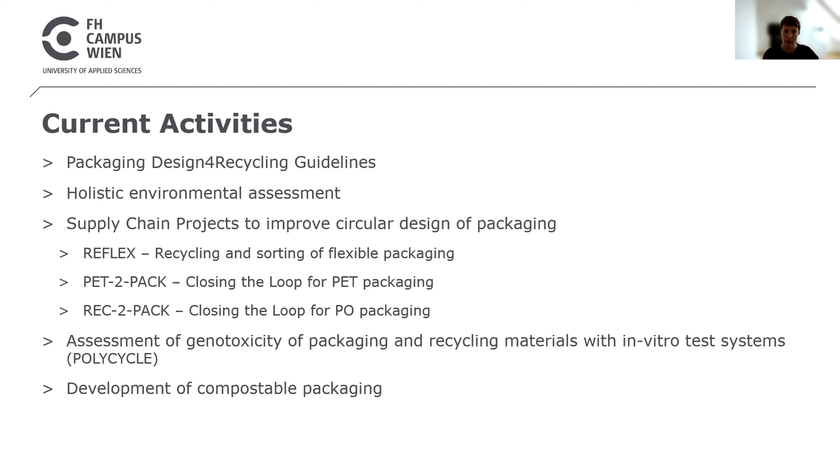As I said, we are publishing guidelines. In the beginning of September, we launched an international guideline with a global recommendation of circular packaging design. We had a cooperation with the World Packaging Organization and the ECR community, so we have a global point of view on how packaging needs to be recycled globally. You can find it for free on our website - maybe I will post it afterwards in the chat - and you can also find it on the World Packaging Organization website.

So let's go into the topic of sorting. First of all, we go into the collection structure, because before sorting, we need to collect the packaging. Here is just a short insight of the Austrian, German, and Netherlands collection structure. This could be slightly or highly different to other countries, so if you want to facilitate the sorting, or if you are a manufacturer, you have to research your region, your country, on how the structure of sorting or infrastructure of sorting and collection works.

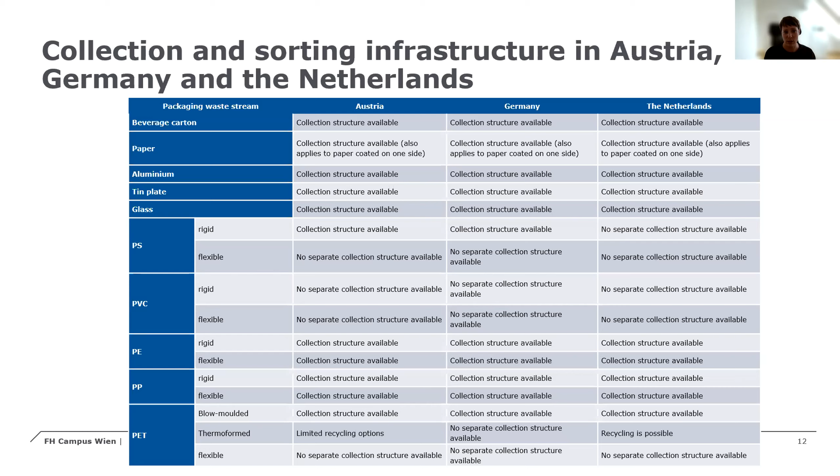The sorting processes in packaging - I just want to give you an overview of which techniques can be used for several packaging materials. But this can also be slightly or highly different in other countries and for different plants as well.

So the sorting process for plastic packaging: first of all, we have a drum screen with holes in it where you can separate small material from larger material. The ballistic separator separates the 2D from the 3D fraction. The air separator separates the lightweight packaging from the heavier, rigid one. For metal separation of plastic packaging, we have a magnetic separator and an eddy current separator - the eddy current is for non-ferrous metals. Then we have near-infrared spectroscopy, the NIR, where you can sort the packaging material more specifically by plastic type. And also manual sorting, which is quite common in many countries.

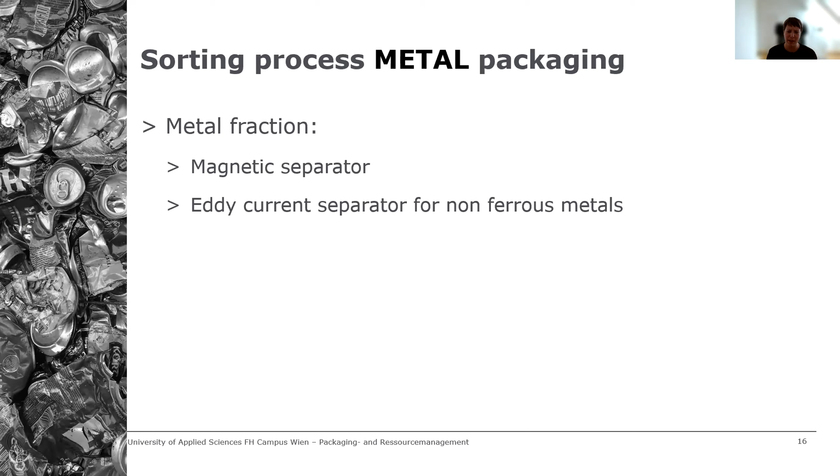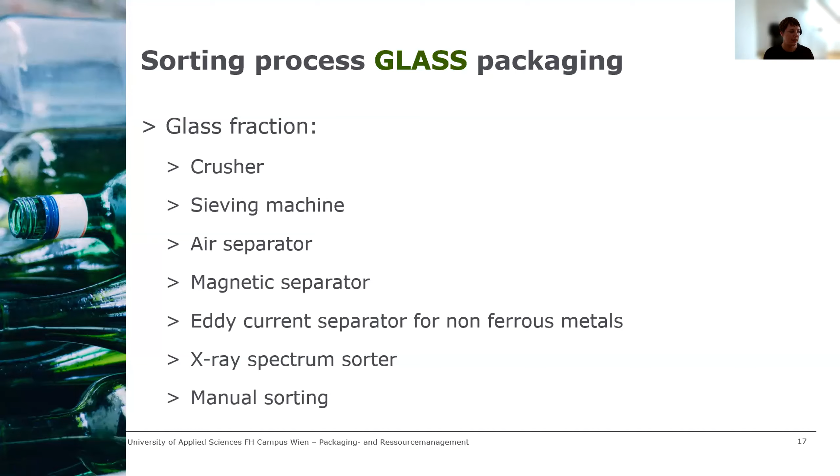Now the glass sorting is quite different from the others. For the glass fraction, we have a crusher which reduces the size of the glass, since there are size requirements for melting the glass. Then we have a sieving machine for separating different sizes, once again an air separator for lightweight packaging, a magnetic separator and an eddy current separator, and also an X-ray spectrum sorter for separating translucent and opaque packaging. And once again, the manual sorting.

Now we go more into detail on what packaging needs in order to be sorted, so the chances are quite high that it gets sorted and enters the recycling loop. For plastics, we recommend that labels should cover under 50% of the surface, because detection can be quite hard if the label is larger and made of another material - the separation can be falsely detected.

It's also required that you have a minimum of 2 centimeters for a rigid package. This could be quite different in other regions for other sorting plants - the range of these holes in the drum screen can go from 2 to 5 or 10 centimeters, so you need to research the region and the country.

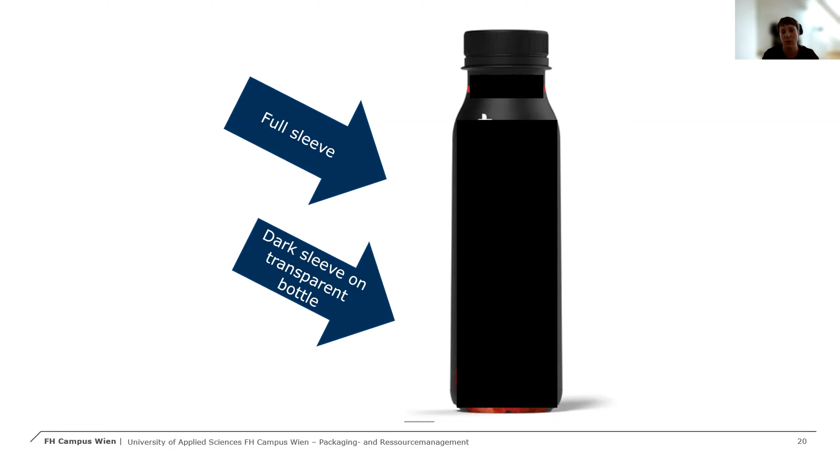For paper, we recommend natural surfaces, monomaterials, or paper content over 95%. I know this threshold is also not standardized. In Austria and Germany we recommend over 95%, but I think it's quite different in other countries.

We also know that composites are a problem. If the paper is laminated on both sides, it won't go through detection and can't be recycled. Also, metallized surfaces over 70% have problems being detected, and again carbon black is an issue.

Now we come to metals. It's quite easy: monomaterials, direct printing, or paper wraps are recommended, and material gets lost if metal is in composite with other materials.

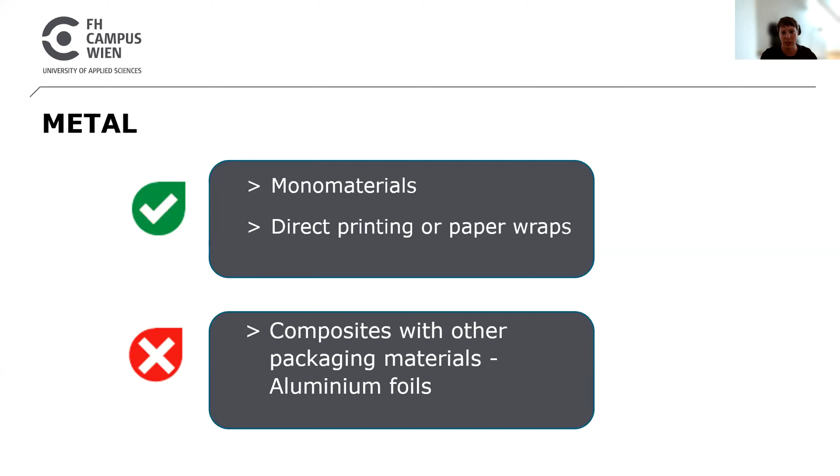Then we have glass. For glass, it's recommended to have small labels and small direct printing, and that the glass itself is highly translucent, with recommended colors being white, brown, and green. Problems on glass include ceramics in and on the glass, ferromagnetics, flip tops, opaque glass, full body printing, sleeves, and large paper labels.

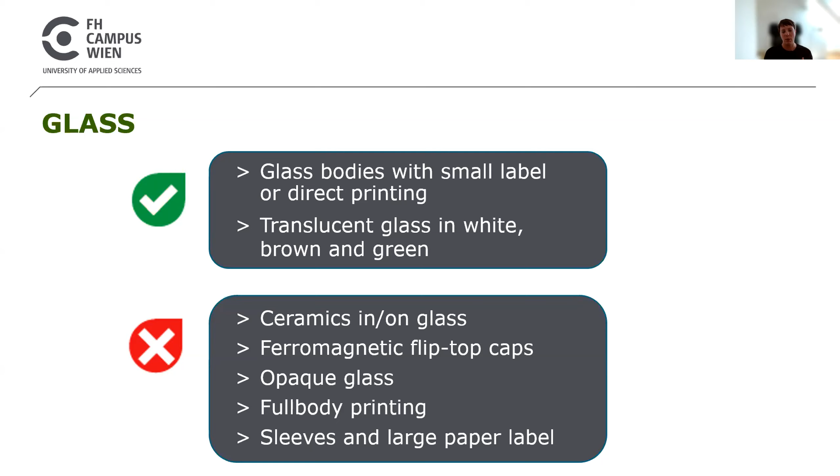Here I have some examples. We have Marina— hi, I'm intervening because we are almost out of time. We have one minute or even less, and if you have another slide on plastics that would be great, because we focus on plastic mainly today. Wait, I didn't hear you. Just to say we have a minute, and if you have another slide on plastics, the focus is on plastics, not glass or metal or paper. So maybe use the last minute for plastics. Then I will stop here. I didn't mean for you to stop, but okay.

We just have the glass recommendations and here the full body sleeve. So yeah, just in general recommendation.

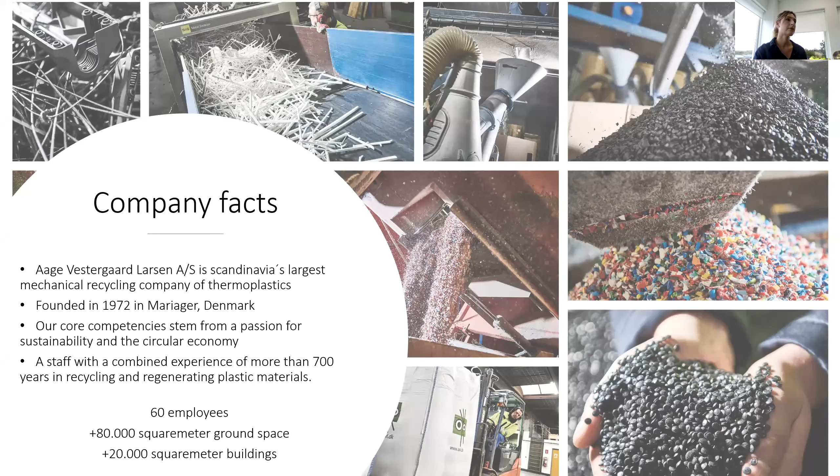Our core business is regeneration and grinding of incoming plastic waste material. We do fine milling, so we make powders. We do compounding of additives and different material sources, and we have a new facility where we do washing, drying, cleaning, and sorting of household waste, our post-consumer material. We also have a laboratory where we quality control our materials.

We purchase plastic waste only from Europe, mostly from Scandinavian countries, and we sell grind or granulates all over the world. We buy the plastic from plastic industries, retail and recycling stations, and different construction companies, mostly polyethylene, polypropylene, polystyrene, PC, ABS, polyamide, and composites.

When we process our material, we do it with respect to the input material's type and quality. If it's really dirty, then we have to do a different process compared to post-industrial material. We also do some work for customers if they have specific demands regarding colors, or mechanical or chemical properties.

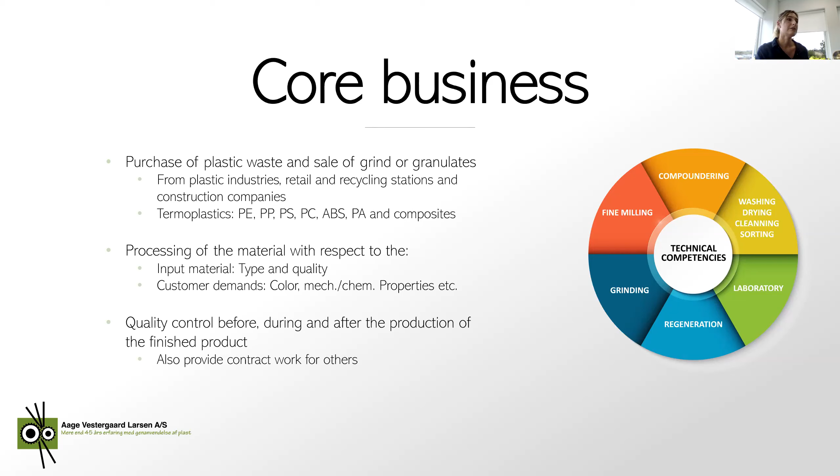As I told you before, we have a very strict quality control of our materials, both before we process it, to assure that we actually get the material we are paid for, during production, and after production of the finished product. We also provide contract work for others interested in seeing what kind of material they have, and whether they should change it to something else.

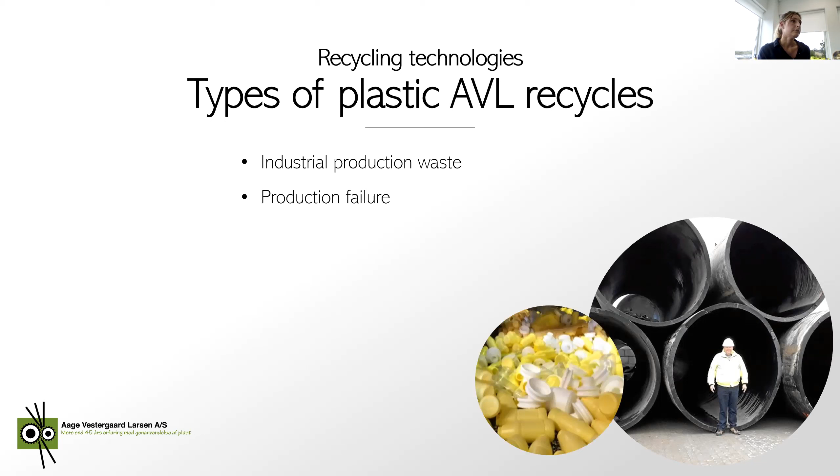We recycle many types of plastic waste. For 41 years, we focused only on industrial production waste, such as the pipes you see in the bottom right corner. We do recycling of production failures, offcuts, and leftover material from production, as well as post-consumer plastic. This could be everything from used polystyrene fridges to household waste, and this is our latest focus point.

So to the most important topic of today, new technologies. New technologies come from new demands, and as we all know, the greatest demand comes from our planet. We see too much overconsumption, overproduction, and misuse of plastic, which has given plastic a very bad reputation. But plastic is actually a very nice material, more environmentally friendly than other industrial materials. Hence we are focusing on reducing, reusing, and recycling plastic as a way to strengthen the circular economy.

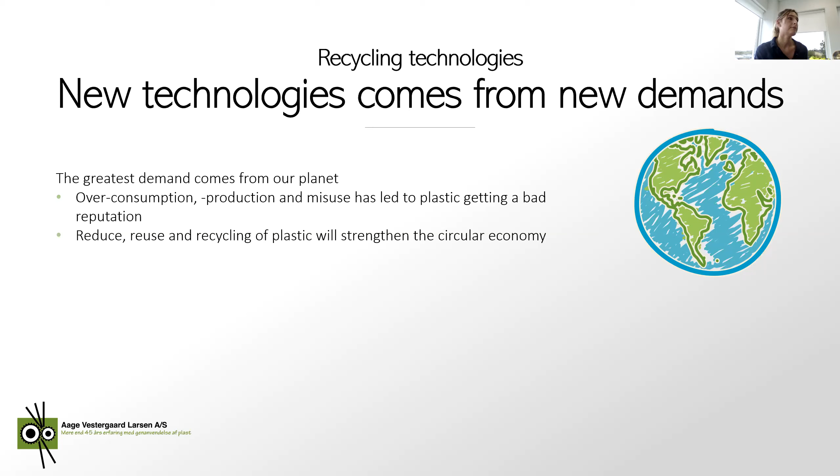Until now, focus has been on industrial plastic waste from building and construction sites, using very simple recycling technology involving shredding and extrusion of the plastic, and to some degree washing it. This plastic waste category covers only about 16% of total plastic production, but it has a longer life, up to 50 years, so it's a plastic type we have a lot of respect for. It never ends up in the ocean, compared to plastic packaging.

Plastic packaging has been and still is the dominant use when thinking about production and use. It covers more than 36% of total production, and this product category has a very short life compared to industrial plastic, maybe days, weeks, or a month at maximum in use. We can see that the stream of this category has increased more and more every year, so that is our new focus.

The great consumption of packaging products has given rise to a dominating post-consumer recycled household waste sector, which leaves us with two problems to solve. The first problem is that new technologies must be developed to recycle this waste category and achieve a good quality material.

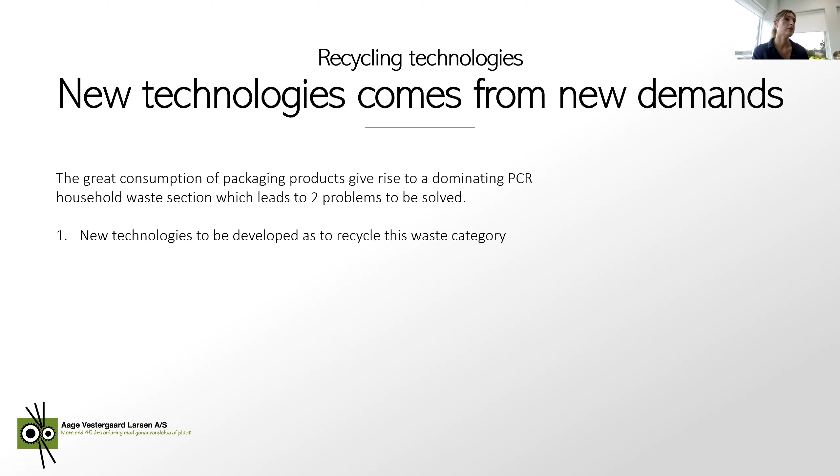Second, new technologies must be developed to recycle this plastic product category, such as from bottle to bottle.

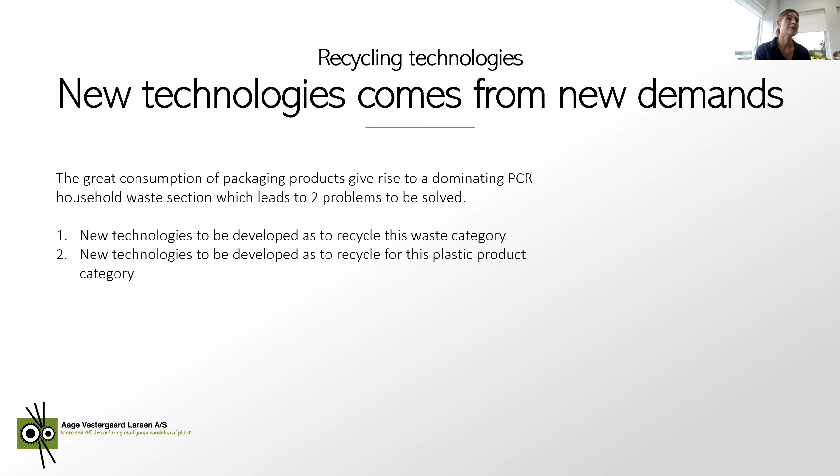I will now talk a little about some projects we have been working on in regard to new technologies for post-consumer recycled household waste. In 2017, we had this project called Development of a Reprocessing Line for Optimal Recycling of Collected Plastic Waste for Households, seen in a circular perspective. We ended up with a prototype called Georg and a final production line called Pippi. We always give our production lines and machines names, so it's easier to remember who is who instead of machine 1 and 2. With this production line, we managed to reprocess highly contaminated material into a material of high quality in terms of mechanical properties.

I have a very short video here which explains it a little better, I think. If you don't hear what is said, just tell me. It's in Danish, but with English subtitles. Oh, that didn't work.

I think you have to press play on the lower bottom. Yeah, maybe. There, thank you. Yes, can you hear?

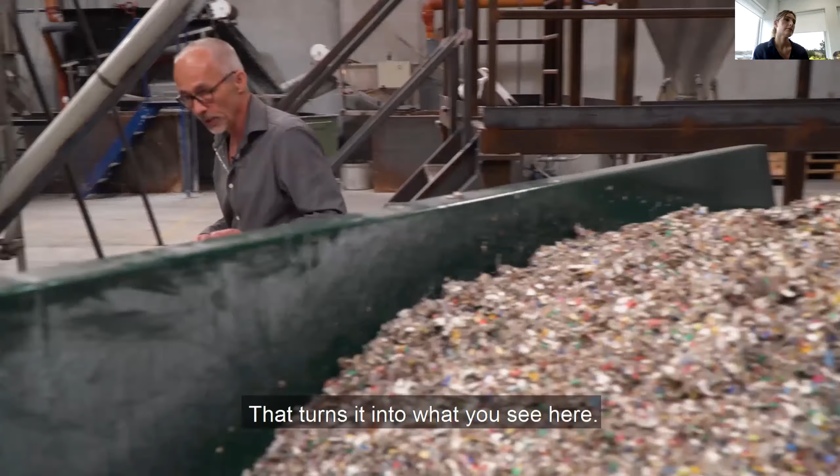Yeah, but the quality is really bad of the video. It's not streaming at the right speed, so it's difficult to see. Yeah, I can send it. Oh, now I stopped sharing the screen. It's great, I'll try to get it back. Two seconds. It's okay, but if you send us the video later, we can share it. I have a link everybody, in the presentation, so it's fine. Excellent.

Yes, we see it again. It's very good that I have a little bit more time than the others. And it's good that Corona is close to having an end to it. Two seconds. And now I can't find my mouse. There.

It's okay, we can share your presentation for you if you can't. No, I think I have it here. Excellent, and then you can. Yeah, we can see it in draft mode. Yeah, it's in presenter mode now. In presenter mode. And still in presenter mode. Yes, do the same magic that you did last time. Yeah, I'll do it like this, I think. All right, yeah.

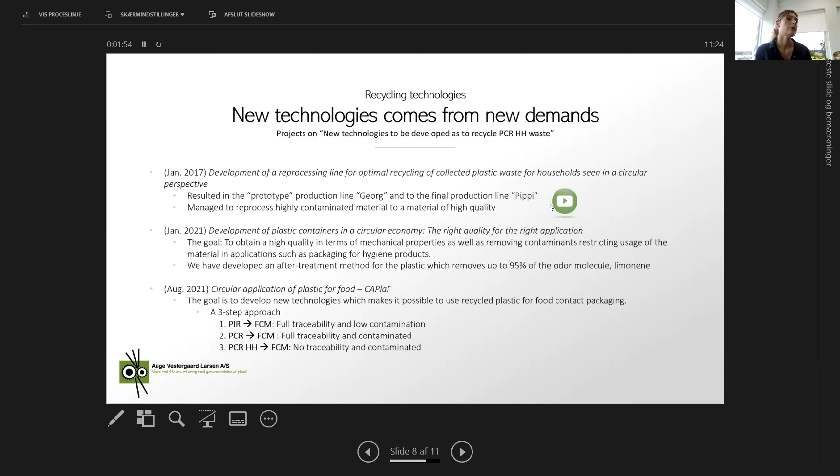In August 2021, we went a little further and started this project called Circular Application of Plastic for Food. The goal here was to develop new technologies which make it possible to use recycled plastic for food contact packaging. As you may know, there are set guidelines for PET material and the recycling processes for PET. These are not made for polyolefins. These guidelines are, I think, made by EFSA, the European Food Safety Authority.

So our three-step approach to make a material low on contamination and possible to use for food contact material starts with using post-industrial recycled material and reprocessing it into food contact material. Here we will have full traceability of the material and low contamination. Then we go a little deeper by using post-consumer recycled material from a known source, such as a take-back system, where the customer sends back their products to the seller and we get it afterwards. Here we will still have full traceability, but contamination. Lastly, we will use post-consumer recycled household waste for food contact material, where we will have no traceability and contaminated material. So our plan is to do challenge testing on the process to see if we can reach the set limits for allowed contamination in the material and follow the guidelines set for PET material.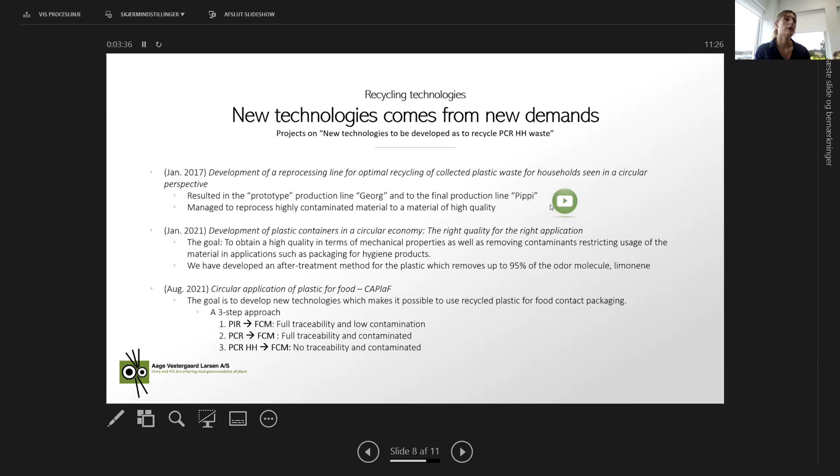So now I'll talk a little bit about our production line for recycling post-consumer recycled household waste.

We were inspired by a Swedish children's book, Pippi, who has this famous quote: "I have never tried that before, so I think I should definitely be able to do that." We think this was a hard task, but we should do it anyway.

The production line starts with macro grinding of the incoming material or waste, as you can see down in the left in the container. We then have a pre-wash of the material to reduce the amount of organic compounds such as dirt, and microgrind it into a processable size of flakes.

We then remove foil by a new technique we have made in-house to increase the quality of the output material. We have two batch washes used for reducing smaller contaminating substances on the flakes with a wash in hot water. We then have a density sorting in water where we can separate material with a density higher than water from materials with a density lower than water.

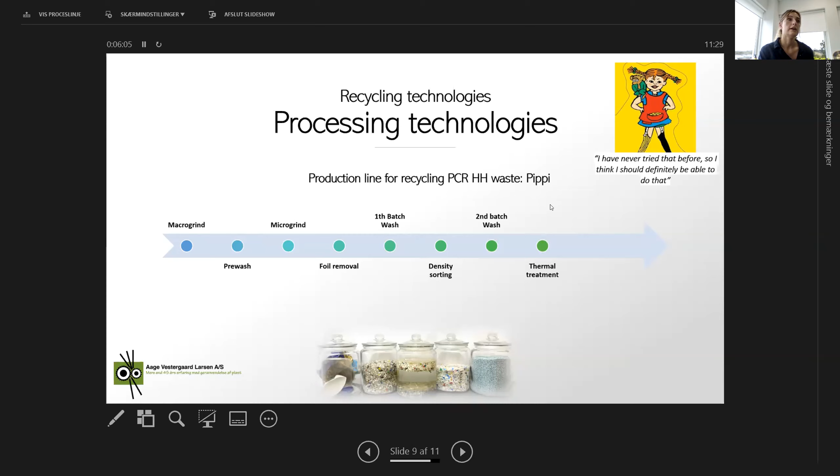Then we have a thermal treatment. This is what we have been working on in the second project on household waste material. Here is where we can remove, to a great extent, the contamination and substances inside the polymer matrix, such as oils and other hazardous substances.

We then have a near infrared sorting machine that sorts by color and polymer type, so we can achieve a very high purity when separating polyethylene and polypropylene. And then, of course, extrusion of the material, so we get these homogeneous pellets.

So we do meet some limitations regarding future developments. The first one is regarding guidelines with respect to food contact. There are no guidelines for these polyolefins. So what we are doing now with our food contact project is to try to be ahead of what is actually allowable today, so that when they say, "here you have a guideline," we will be ready.

We need improved waste sorting at waste sorting facilities, in terms of polymer purity and production efficiency. Depending on the source of the waste, we have a pretty high degree of waste when we let the material go through this production line.

So what can we do when we're left with materials we can't use? Often we send it to other plastic recyclers, it could be for PET, or we have to send it to incineration, which is something we really don't want to do. We have also seen that chemical recycling companies can't even recycle the material we are left with, which we can't recycle ourselves.

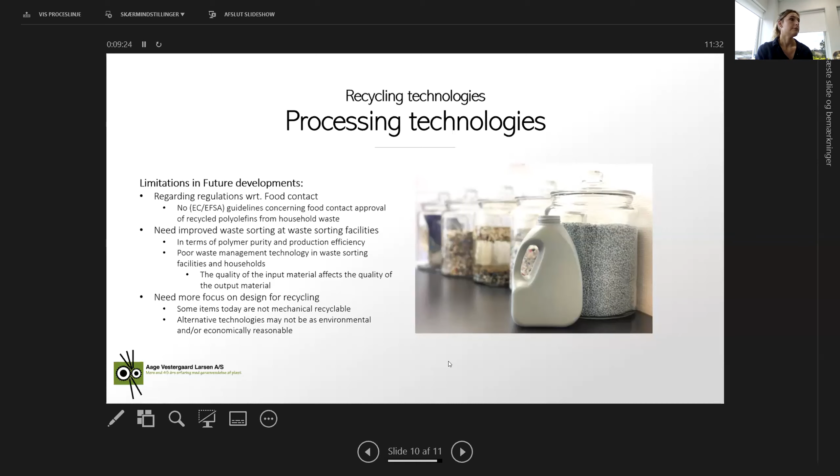Yeah, I think that was all I had. The movie should take some time, but yeah.

Yeah, I was going to say that we saw Pippi and we're very curious now to see Georg, but we couldn't.

We'll see later. Yeah, we will send the clip around. Curious, of course, about this hasn't-been-done-before project with food quality.

How do you work with other entities besides you? Who are your partners on this project? Because there's a tracing element and a logistics element involved here.

We are working with different producers or plastic product manufacturers, such as Arla. They make bottles for milk, or packaging for milk, and many other types of that. So we start with a take-back system for them. We have this post-consumer recycled material, but with a known traceability, and they will test their materials. But as I told you, we know it won't be possible before EFSA has set these guidelines. So we will just prove that it's possible, technically. Yeah, that is what we aim to do.

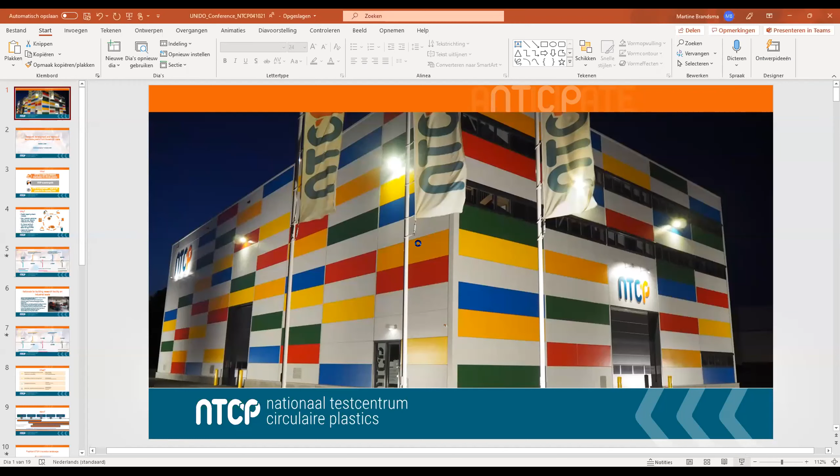I guess it's shared now, and if I'm lucky it's in presenter mode. Why is this doing it? At least it's doing it to everybody. That's true. Now it's good, yes, okay.

So thanks again for having me. My name is Martine Brandsma, I'm the director of the National Test Center for Circular Plastics. It is the colorful building that's on your screens now. The architect came up with this idea, stating we are located in an industrial area, but that all these industrial buildings are quite boring. He also mentions that plastics in some cases had quite a negative connotation for a lot of people, and what's happening inside here is really positive. Basically, you could see all these little blocks as randomly found Lego blocks that eventually turned into this building where we work on circular plastics. And if we break it down, we could build up a new building again. That's the idea of the architect.

We're going to talk today about research, development, and testing of recyclable plastics from household waste. I would like to take you through some of the rationales behind setting up this test center. We're quite a young organization, but also why there was a need for such a center and what we are especially doing here inside. So who are we?

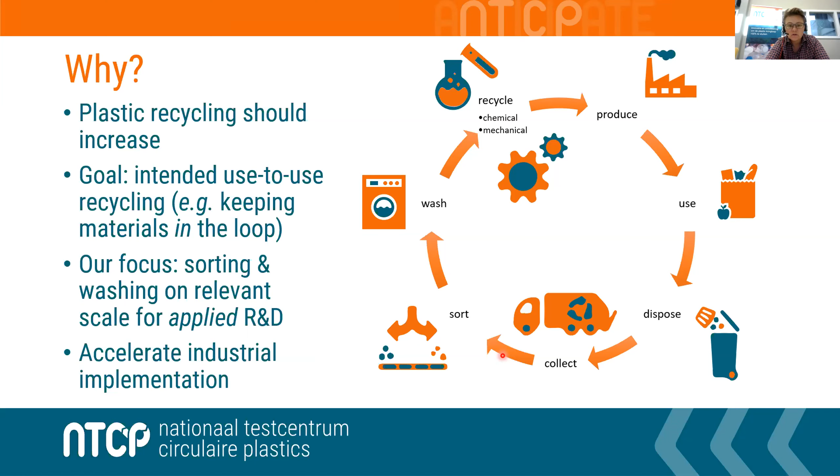Sorting and washing is not only relevant for mechanical recycling, but also in this rather new field of chemical recycling. A certain amount of sorting, and in some cases even pre-treatment, is needed to make the material fit for these chemical processes.

To give you a short idea about the development of this center: at the end of 2018, we started based on some needs in the market, figuring out what would be needed to really set up a test and research facility, because it was not there yet in the market in this field. We started building the facility physically in 2019. So that moved really fast.

The rationale behind building this facility on an industrial scale is that we really foresee, in this feasibility study, that large improvements can be gained if more material ends up in purely sorted streams. Laboratory setups are really difficult to scale up to an industrial scale, especially in terms of throughput and volume, but also equipment sizes.

We also noticed there's a lack of publicly available quantitative data on sorted streams, their composition, quality, and yields. And there were no independent organizations available with equipment on a relevant scale to test and research sorting, and specifically the sorting and washing process. There are some setups available in Europe, but usually they are owned by equipment providers, mainly used to demonstrate how well their equipment works. We rather have a different perspective, really from an R&D point of view.

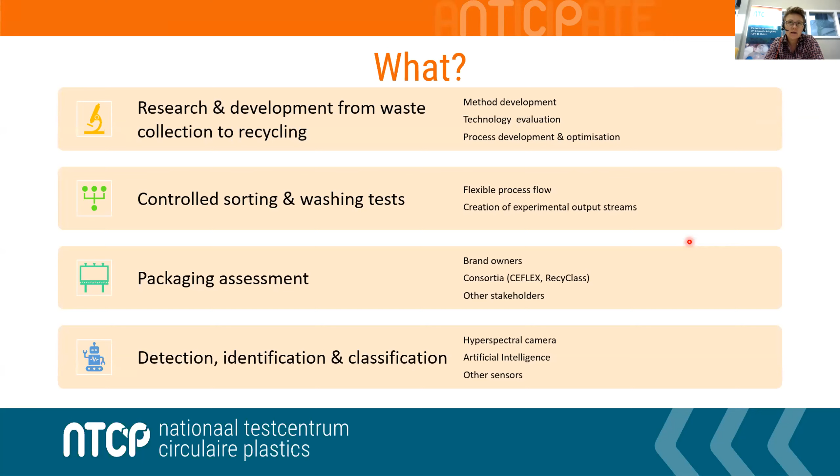Packaging assessments. And we have our own research programs on, for example, detection, identification, and classification. So what would sorting in the future look like, 2 to 5 years from now? And how did we set up this business model?

As I said, we perform projects for the full chain - from brand owners, sorters, recyclers, till technology companies. These projects are usually contract research or contract test projects that we perform for one company. It could be a large project or a small project, in terms of a few days or a week till a couple of weeks or a few months in total time.

The second part of our activities consists of setting up research programs, because of course, only building these facilities will not give us a sustainable position towards the future. We also need to continuously develop our knowledge position, keep in charge and keep in line with what technology developments are there in the market.

So basically that is where we use these research programs for. Usually these research programs are acquired either from national innovation funds, for example in the Netherlands, but it could also be EU programs where we participate in consortia. And we've also built this year our own research program together with 9 industries and 2 universities, in this case on sorting and artificial intelligence.

Basically, that is our strategy, to keep a balance in our activities where we have a continuous flow of research programs in which we can build and accelerate upon the knowledge position that we have. Of course, we also continuously work on developing new programs, and all the questions that we get directly from market projects, we let them flow back into these research programs to know how we should develop these programs for the long term.

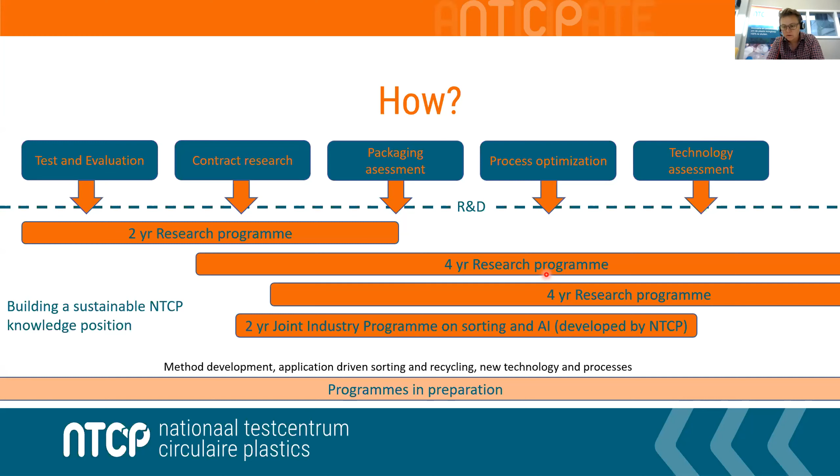So it is really about applied testing and research. And with that, we basically fill in the gap between what is already established technology in the market. You could say that usually universities are a bit more on the other side of the spectrum, really focusing on game-changing new disruptive technologies that can be implemented 5 to 10 years from now. This is really the area where we focus upon, so definitely in between industry and academia.

So the current status of the NTCP is that we have basically been operational now for 1.5 years, running a lot of different projects. I think we've done over 40 to 45 projects at this point. And we are also working on the realization of phase 2.

So we are currently working on building an industrial washing line, and started with that project in July 2021. That will also be built from the same design principles as the sorting line, so it fully represents state-of-the-art technology present in Europe at this point. However, it is also fully customized for us, so that we can take out all the data, sample at every point in the process, and change the order of the different sorting steps, for example, and in the future also the washing steps.

We can also implement new technologies physically into our line to really evaluate new technology developments. So for example, certain marking technologies, if there is a new machine developed, we can physically implement it in our line and evaluate it in combination with already existing technologies.

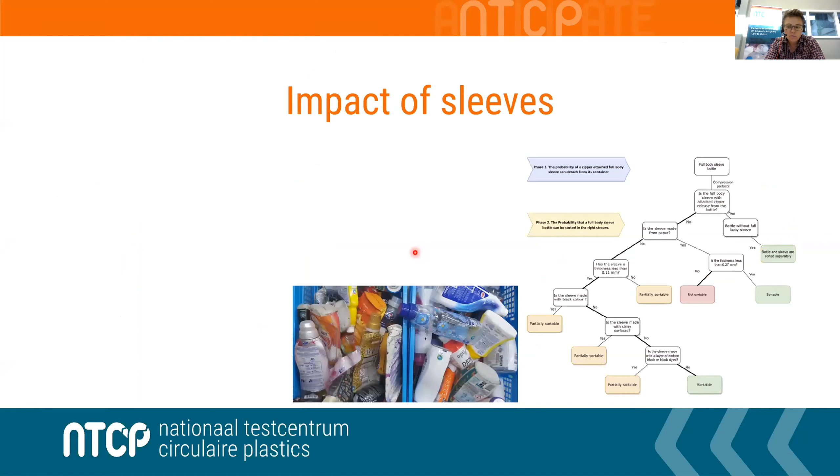So what is it then that we do? Well, we always work with real waste streams, of course, with these industrial equipments. Our line has a capacity of around 2 tons per hour. If you translate it to industry, industrial sorting installations for plastics are like between 16 and 25 tons per hour. So it is smaller, but it includes all the same steps and all the same equipment.

One of the examples that you see here is sorting trials. Basically what we developed here together, amongst others, with RecyClass and Cirqpack, is the European market sortability protocols, in which we simulate the process of the total disposal, collection, and sorting. Basically what we can do here is assess whether individual packaging ends up in the right sorting stream and ends up with that in the right recycling stream.

Here you see an optical sorter using near infrared technology. This is a standard industrial optical sorter. However, we have customized software in it in which we could read out per pixel what it records, what the spectrum is, on how the machine evaluates the packaging. So what type of material the machine sees, and why, for example, a certain package is either sorted out of the stream or not.

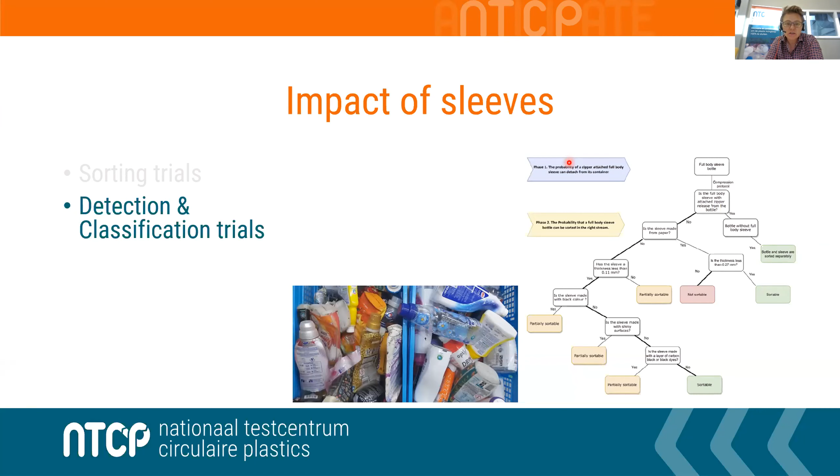However, as Marina just mentioned in her talk, what are the potential thresholds? That is some work we performed together with the Dutch KIDV, where we looked into how we can make a design decision tree on how these sleeves should look, what thicknesses could or could not be used, but also what type of paint in terms of reflection and shininess, etc. But also what is the impact, for example, of the disposal process on the zippers currently used for sleeves. That has led to a decision tree on sleeve design that is now being adopted by the Dutch Packaging Waste Fund and can be used by retailers and brand owners for their future packaging design.

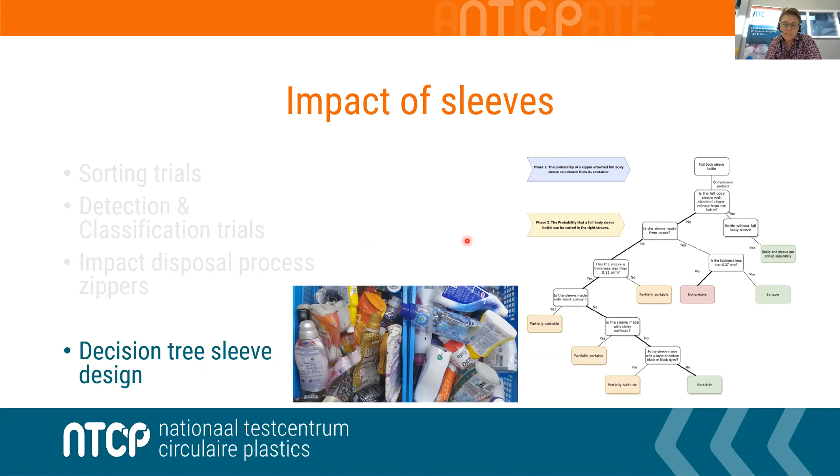When we started in May last year, one of our first projects was for the CEFLEX consortium. It's a large European, multi-stakeholder consortium with players from the whole chain, and basically they focus on making new film material out of waste film material.

For that, the development of a complete new sorting protocol is needed, because usually flexible and film material is taken out of the stream by wind sifting. That means all the PP and PE and some of the PET film end up in the same stream, in the same bucket. And if you want to recycle it, you want to really make the distinction between PE and PP film and take out the PET film.

So what we did is change the order of the sorting process, and proved that with the process we developed, we were able, with the current infrastructure used in sorting installations, to sort PP and PE film, and also PE in different gradients and colors, separately out of the stream. With the specially developed quality recycling process of CEFLEX, meaning there is also a specific washing and extrusion step, we were able within a year to go from this new sorting protocol to new packages that were actually produced.

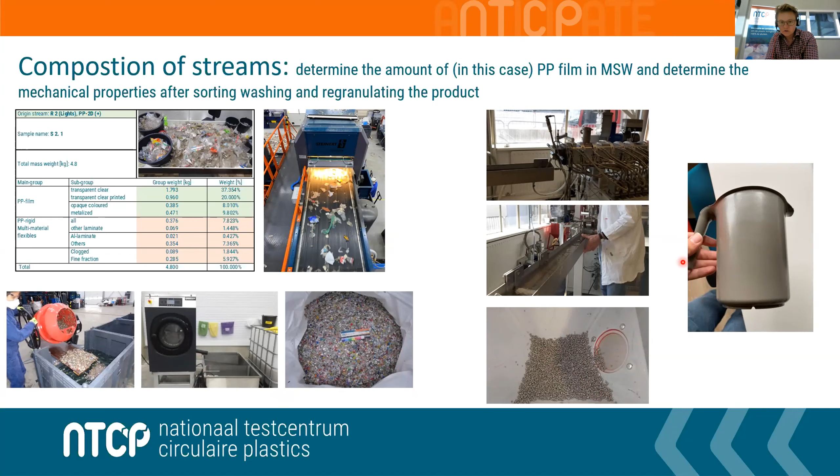This is another example of the characterization and compositional analysis of streams. I wanted to quickly show this because it's relevant for different chemical recycling processes. For example, in pyrolysis or other chemical processes, it's really important that there's no PVC or PET in a waste stream. The first question is: what is in the stream? Second: what is needed to remove the specific contaminants that impact the next step, the recycling process?

Another example of our work, moving more towards the future, is using new technologies and artificial intelligence for sorting materials. We've built a physical platform to test and evaluate different types of sensors available in the market, which could characterize objects beyond just material type. By combining data from different sensors, could we determine the heritage of a certain packaging? For example, could we figure out whether a PP object in a PP stream has a food heritage or a non-food heritage? This is really important in the discussion of moving towards food-to-food recycling.